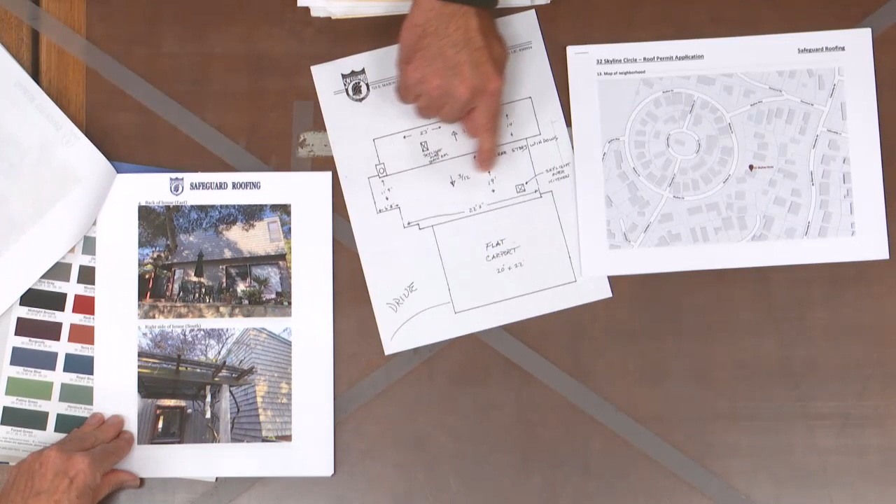So show us the roof. All right, so we have several sets of photos here, including our roof plot plan. This roof slopes in two directions, there's no ridge line because the roofs are like this, so there are clear story windows across here. From the street, you can't really see the back side, but this part is visible kind of through the trees.

So the very first photo here is the street view of the house, the roof is pretty much obscured by the trees. Then here's from the front of the house on the driveway, so you see the sloped roof and the flat roof here. We were also asked for photos of all four sides of the house, so here's the north side, we have east, south, and I think I skipped one.

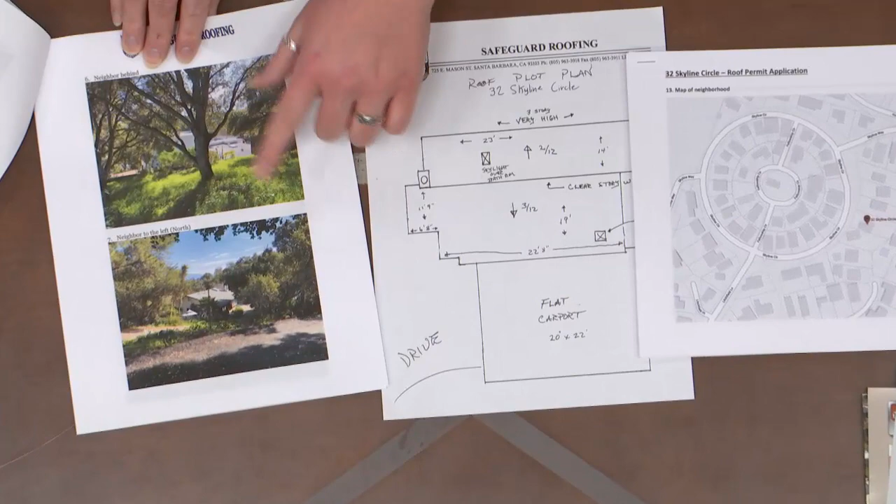West, north, east, and south there. We have several photos of the neighborhood showing various kinds of roofing materials used throughout. There are some neighbors to the back with flat roofs, some comp roofs, and there's a rear neighbor that has a corrugated metal roof, which we noted here on Fellowship, and we have a photo of that back here as well.

So they have a gray corrugated metal roof. That's directly behind Sarah's house, although you can see it from Fellowship, not from Skyline Circle.

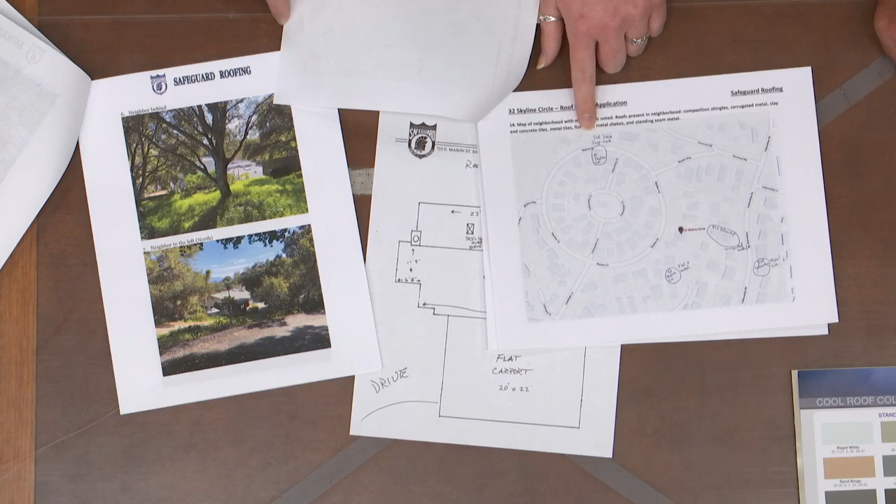So there were several other metal roofs in the neighborhood. There is a standing seam metal roof already on this street in white at 81 Skyline Circle. This is the proposed site, 32 Skyline Circle, that we are applying for. Down the street a little bit, there was a flat roof and metal roof at 20 Skyline Circle. And then also on Fellowship, there's a metal tile roof.

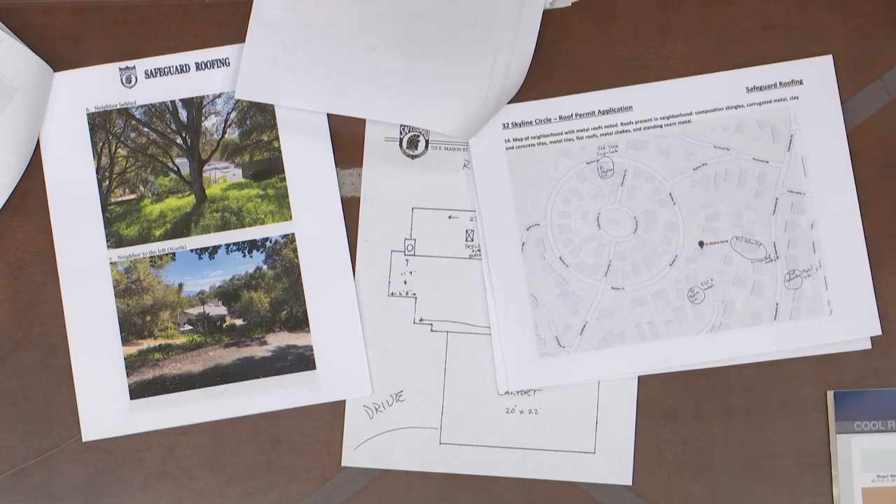There's definitely some metal present in the area, but the roofs throughout the neighborhood are composition shingles. There was a metal shake, a metal tile, a couple of standing seam metal roofs, clay tile, concrete tile, and a bunch of flat roofs. So it's quite an assortment, and I guess the word would be eclectic in terms of style and rooftops.

There's both traditional houses and even a very contemporary house, right over here on this part of the circle, sort of in between the traditional houses. And some old Spanish ones as well.

The color that Sarah was leaning towards is musket, which is kind of a coffee color. It actually reads a little bit lighter in person than on that chip. Her house has gray walls, some red trim and some green trim, and it was a nice contrast with that color. That color would blend really well with the trees and vegetation.

She has a lot of trees and vegetation around her house, to the point where when you're standing on the street looking down, you really just get glimpses of it through the trees. You don't really see it.

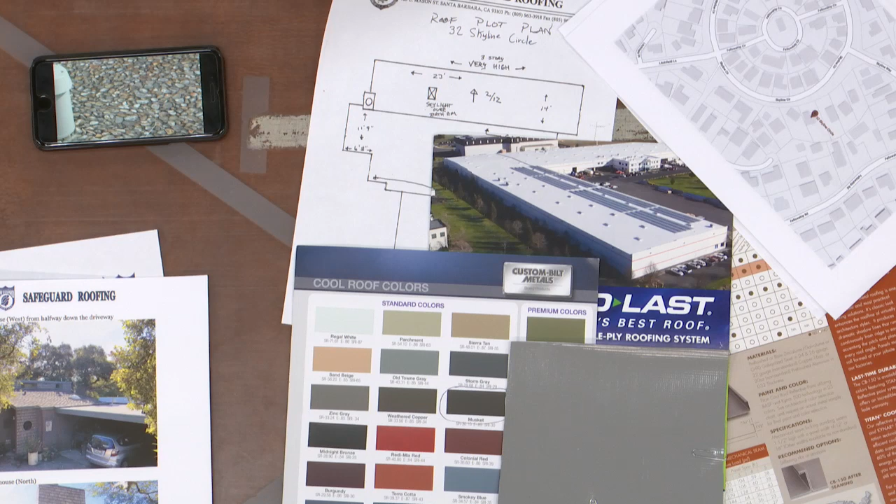So the house is a light gray with red trim and green trim, and the dark gray goes really nice with that, and that real dark musket, kind of a coffee color, contrasts nicely. So here it's a print of rocks, but it's the same finish. It's a little bit - it looks like bugs almost. Sarah thought it looked fake, her son thought it looked fake, and basically the consensus was we'd really prefer not to do fake. I can appreciate that. By the way, that was a color I had shown her already to see if she was interested.

So I have a question - the distance between the seams and the ridge heights. The distance between the seams is 16 inches, so it's just like standard construction, like 16 inches between the studs. It's a 16-inch wide panel, and the seam is the thickness of a 2x4, about a 1.5-inch seam like this.

They have different seams in metal. Most roofers like the snap lock style, where you push it down until it snaps and you're done - it goes fast. These seams will all be crimped, which locks the whole roof together. This is snap lock, but what we're proposing is a seam that gets crimped, making it real tight and monolithic.

And wind resistant. This is the standing seam that's on the same street - not the corner one, that's not what we're proposing. This is the panel we're proposing.

The metal is really nice if you want to do rain barrels and collect water - it's actually the preferred roof for that. Sarah and I had talked about that a little bit. It's also really nice if you ever decide to do solar - you don't have to penetrate the roof. The stanchions can actually clamp right to the standing seam, and then the panels can mount to that, so there's no additional work if you wanted to go back and do solar at a later date.

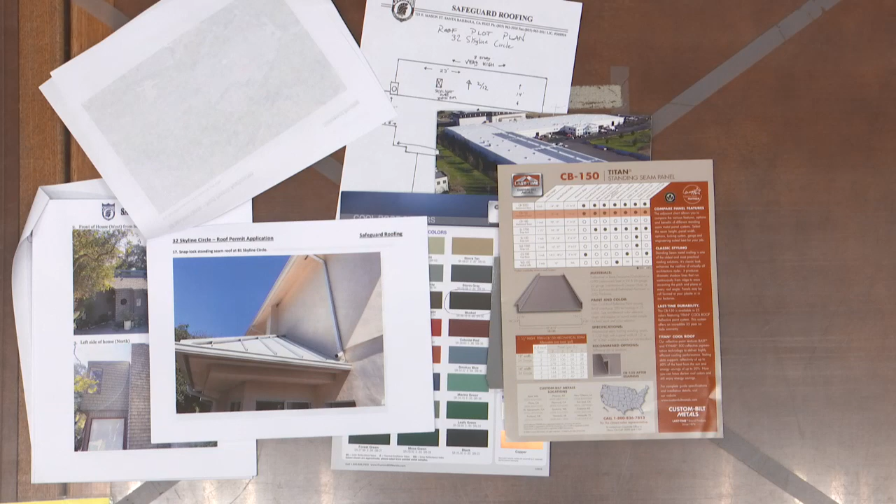What about gutters? Do you propose to put rain gutters around this that match it? That will be up to her, and we can do it, and if we did it, we could match them. I don't know if she's decided.

Rain gutters - would they be the same color, same material? Not the same material, but it would be the same color. The roof material is 24 gauge steel with a Kynar paint, and the rain gutters would be aluminum, but even though it's two different materials, you can match the color down. Musket - and it makes it look really tight, like it was well thought out.

Going to comments - does anyone have any comments? A couple comments I have: what is your feeling about doing it on 12 inches on center as opposed to 16 inches on center?

It tends to look busy. We've done 12, 16, and 24. The 16 generally has the best aesthetic - when you start getting them closer together and you've got a lot of lines on the roof, it tends to look more busy. This one is sort of a happy medium between the 24 and the 12. The funny thing from my experience is that narrower looks better than wider - the wider you get, the more industrial it tends to look, whereas when they're closer together it's different. I don't have a logical explanation.

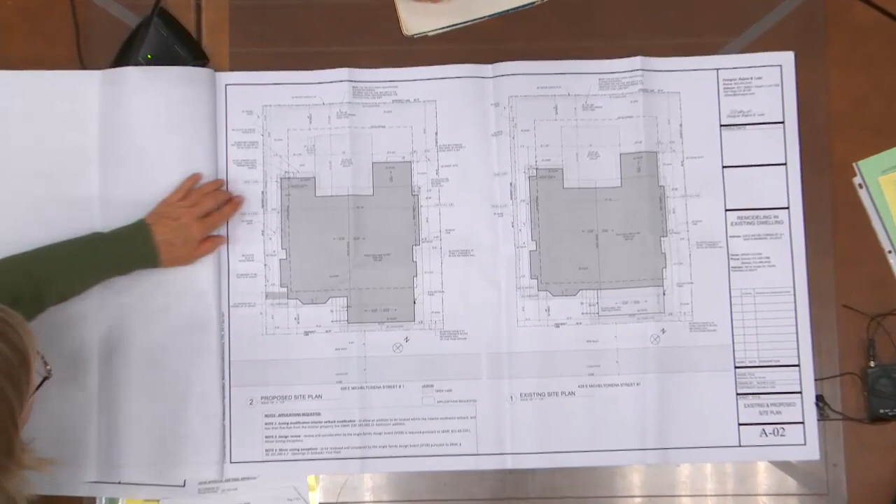Okay, so here's the water heater. Let's see if there's an elevation. Location of existing water heater — water heater cabinet walls enclosed with same existing house wood siding, gasket door. So yes, okay.

The water heater on the site plan, does it pop out? Turn it back to the site plan. There. Then the line should... looking at it, should have two lines right there, or don't have any. Nothing there. Sorry, let me point to that.

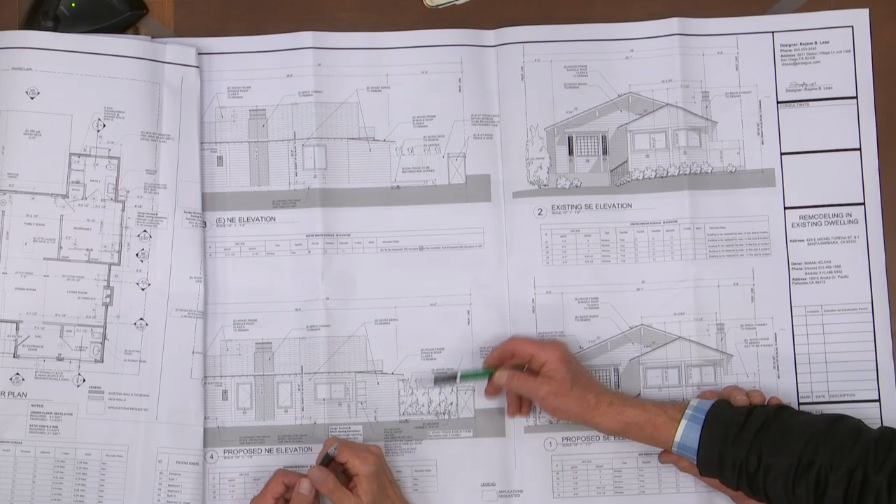It says location for water heater, cabinet walls enclosed the same as existing house wood siding, gasket door with vent. So it says it, but it's not drawn. Right, exactly. So there would be — okay, I understand, what is that, A4? No, A2. There would probably be a line down there like that. Oh, I see, okay, that's what the site plan looks like. Here's my architect, he's $200 an hour.

So, is there north? Okay, so let's look at the south elevation, southeast. Okay, so... oh yeah, okay, you didn't say it, right. What was that again?

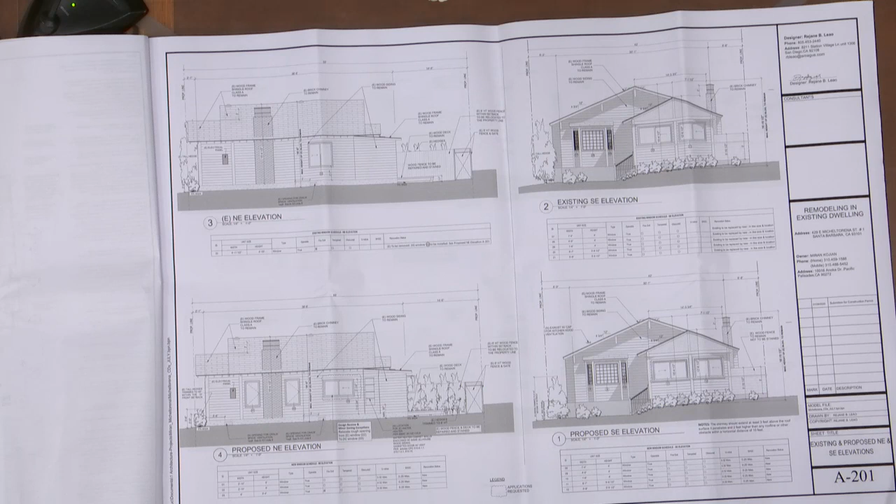Provide details of the pop-out window on sheet four. So sheet four — are your details... okay, all right. That would be these, that's the... yeah. Can we see, Erica, can we see the previous drawing? Yes.

Oh, I didn't go that far because it didn't include it. Put your thingy on — yep, I didn't know that. That's right, so we've now included a sheet. Yeah, this sheet's new, okay.

So I'm going to say you completed your presentation, so I'm going to bring it back to the board. Is there anyone in the audience wanting to speak about this project? Seeing no one come forward, were there any emails or communication? No, Mr. Chair, you're all my friends. Perfect, so we'll bring it back to the board for questions.

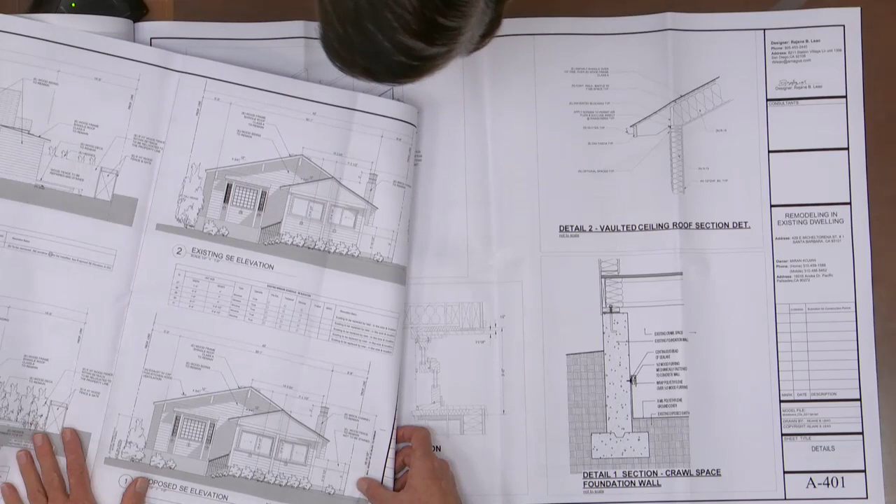Any questions, other than one? So I have a question — what is this little bracket down here? I don't think... there's a little bracket cut off on the bottom here. I guess there is none — where is it? It shows detail of a bay window. Yeah, where's the bay window? A big window, but on the...

9, 10 — 8, 9, 10. So I think they pulled it out of a catalog, it's probably a typical thing. Okay, but that's what it looks like, whatever. Okay, all right, that's a question I have. Any other questions? Anyone have any?

I'm not seeing how this water heater enclosure works. We played architect and drew a line down there. The description right here describes what is not drawn. That little funny thing is the water heater itself—I think they drew it in there. What it needs is a line down on the right-hand side of those three little boxes, which then looks like what the elevation looks like. So I think it's worded correctly, but drawn incorrectly.

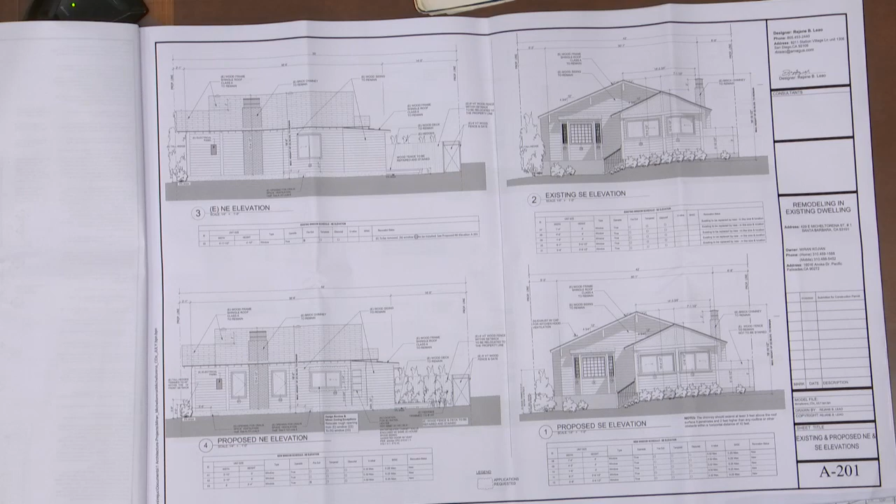Is that on the elevation? Not on the site plan—on the site plan it is not. It's drawn correctly on the site plan, but the way it's described, that's what we'd ask for. Yeah, the description is there.

Okay, hearing no more comments. Let's see, what are you here for—final design approval? Project design and final approval. So we can either bring it back to the board for another round, or if you want, give it project design or final approval—that is an option. So who would like to make a motion?

I will make a motion. The board would like to give this project design and final approval with the comment that you make sure you have drawn in the defining line on A201 that delineates the water heater closet on the northeast elevation, and that we accept the request for the minor zoning exception to allow window alterations located within the required interior setback. This project complies with the NPO findings.

It uses quality architecture and materials, is compatible with the surrounding neighborhood, has consistency in appearance, and follows good neighbor guidelines. Thank you—do I have a second? I second it. Did she say everything that needed to be said? Yes.

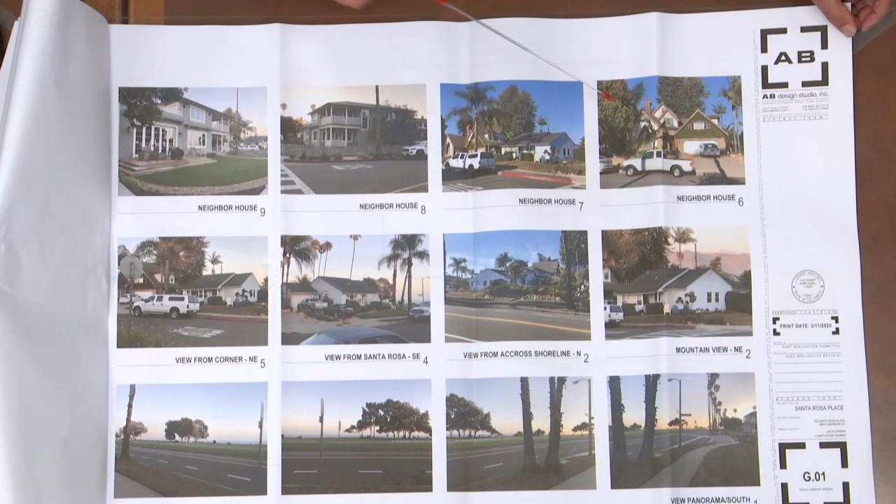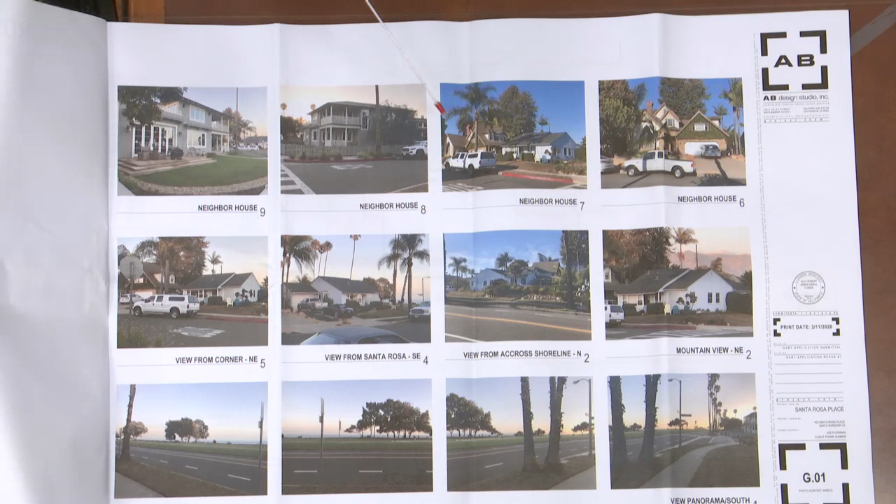This is a property across Santa Rosa on Shoreline that finished construction 4 or 5 years ago, I believe. Look at that. Neighbor behind us. Neighbor to the north, you can see here on Santa Rosa. Is that too far away? Okay, all right.

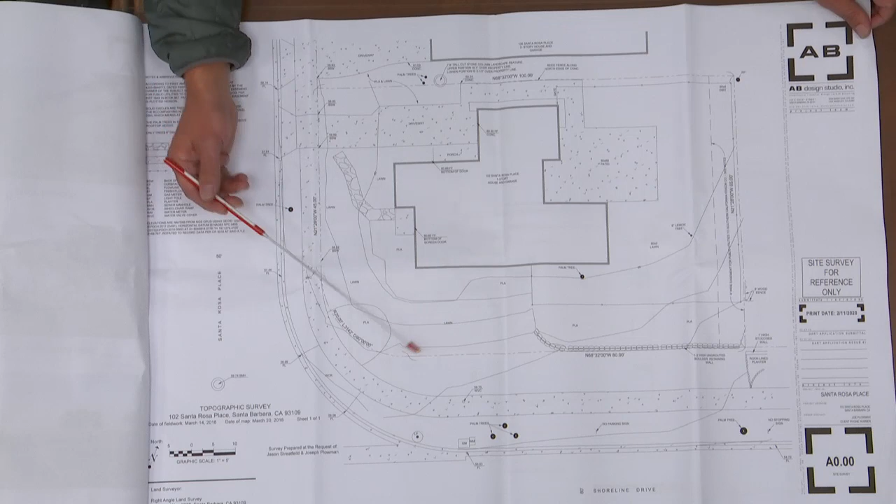You'll notice the property line comes along the back of the sidewalk on this side, but on this side we have a lot of real estate in the right-of-way. That doesn't really impact us, but we have a double front yard setback, here and here. So to address some of the prior comments, I'll get into that on our site plan—it's a fairly constrained site once you put in all the requirements we need.

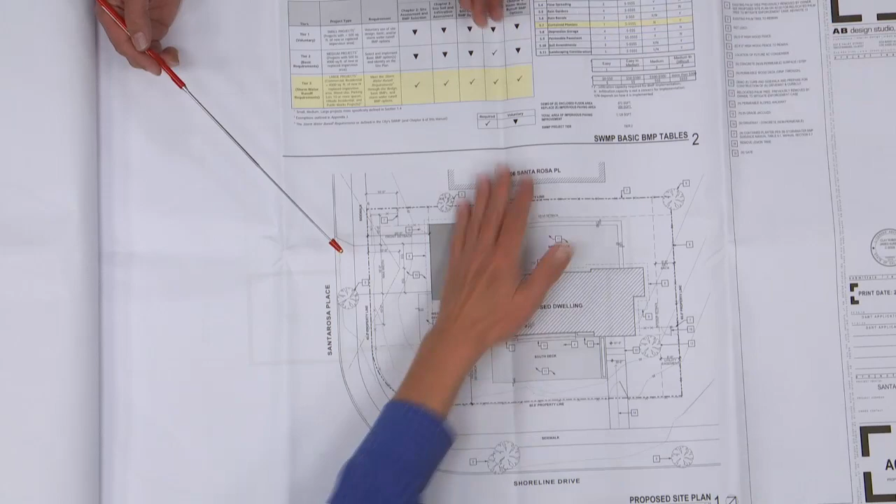So you take that line and these lines here, and your building sort of forms automatically. We do have a 6-foot setback on the east side, which we've pulled the house away from, just to provide more yard space. The home will effectively have a single-story garage here, and this will be 2-story with a deck on both sides and a real see-through feel—both sides open up. You'll see that on the floor plan. Now you remember?

We are proposing a full basement underneath. So a couple things—we've got a mechanical room. The owner's very interested in doing geothermal, as well as solar. We're looking at the Tesla solar roof panels as a potential. But that's the kind of drive of the house—we want it to be as eco-friendly as we can.

Floor plan—again, I mentioned the deck, so there's a deck here and a deck here, and these doors open up on both sides, so it's very see-through. If you're sitting back here, you could see out to the channel.

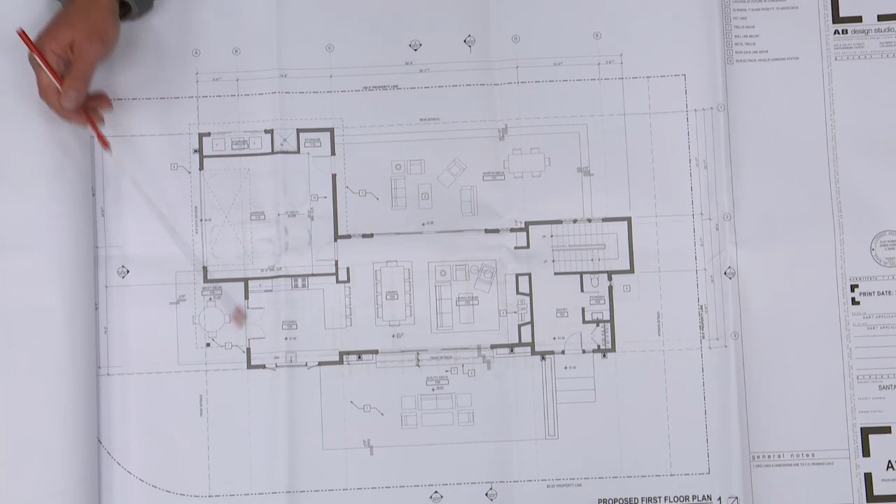Kitchen with a small deck off of it. Entry is going to be off of Shoreline. It'll actually be readdressed at some point, but we'll be coming off here with the front door. Stairs go down and up.

Pretty simple floor plan. Trash storage is here, an outdoor surf shower, a couple other things, but those are pretty insignificant.

The upstairs is fairly modest in size. It's got 3 bedrooms. The master's not very large. The closet, of course, is bigger. Fairly decent, modest master bathroom, and then these 2 bedrooms with a Jack and Jill in between.

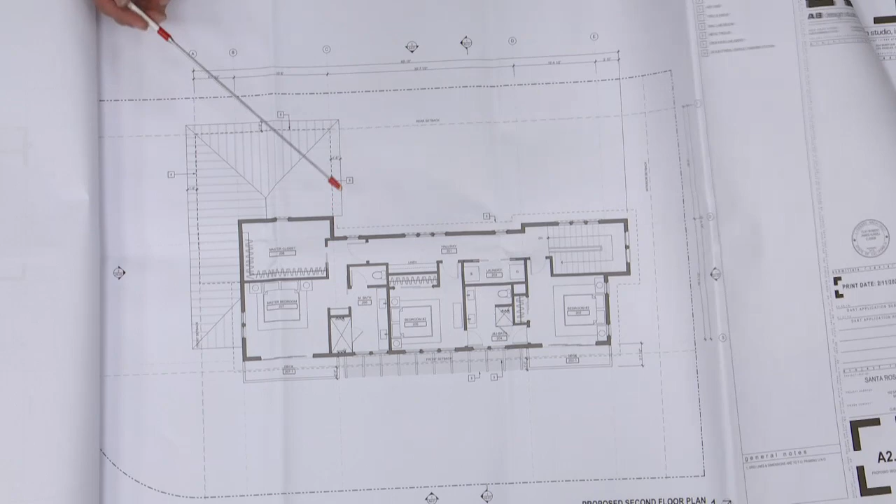Roof plan. So we initially were considering going with a standing seam metal roof when we first came in. We're looking at the Tesla roof panels now to see if that can be an option for us. If we do that, then that would obviously change this. And we have, I think, some examples of that system.

So the elevation here, this is the south elevation facing Shoreline, and the north elevation. The south elevation, we're really constrained on the size of the lot. So it is a 2-story house. It does have some variations.

These pop out a little bit forward. We've lowered the plate heights a little bit and raised the ends and lowered the middle. So we're trying to vary that.

There was a comment from a board member at the last hearing to maybe add a trellis or something like this along the front. So the previous drawings? I don't think we brought them. We'll have them, she'll have this. Eric will find them. And then we've really just been working with windows and details.

So the idea would be there would be integrated planters in front of the house. This would plant up and vine across the front of here, thus breaking down that 2-story mass.

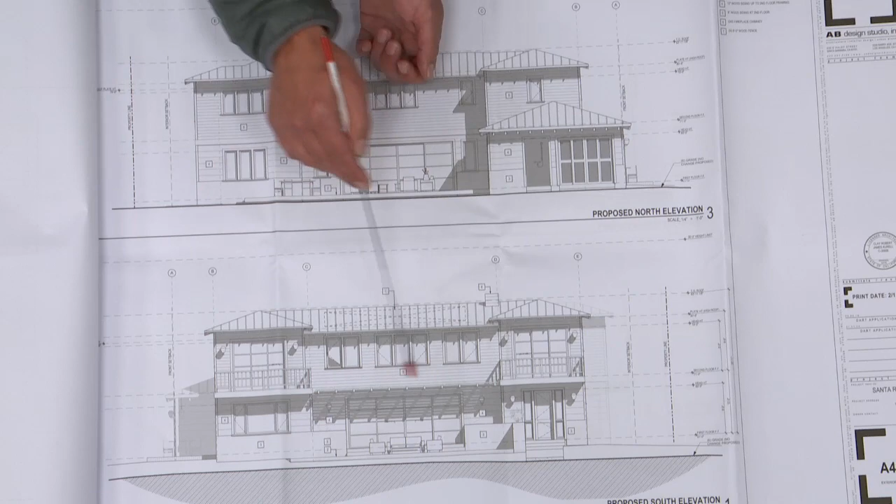Let's just see what transpired since. So this is kind of what we had before. Which one's south? That's the south.

So we played around with these roof heights a little bit to give it some variation, but it's always going to look funny in a flat 2D elevation, as we all know. So the windows changed, these changed down here a bit. This came up a little, that went down a little.

Consider lowering the west corner element of the whole structure in order to change the bulk of the building. Did you do that? Yeah, we considered it, but again, we're so constrained with our setbacks that we really can't lose the square footage and change the overall shape of the building there. That would be this corner, which is the master.

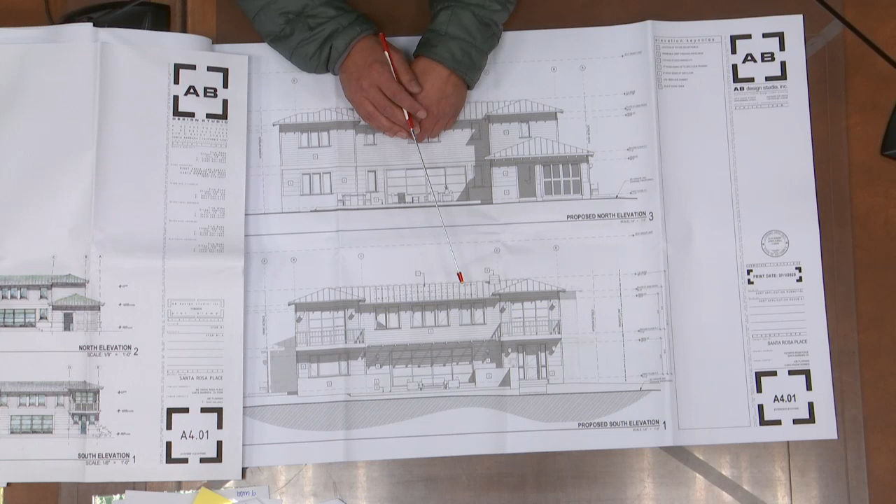Study the windows on the east elevation. Did you do that? Where are we? East elevation? That's the next page. There was a comment previously from one of the board members who's not here, just really around this window on this side. So we've altered it a little bit. We've added a couple windows up above in the bedroom. But there's not a lot of change to this side.

This is east. There's a new window down, or this window changed a little bit down below, and then these 2. I think it's added a couple more windows. Yeah, it changes the size. That just looks more in keeping with the neighborhood than that.

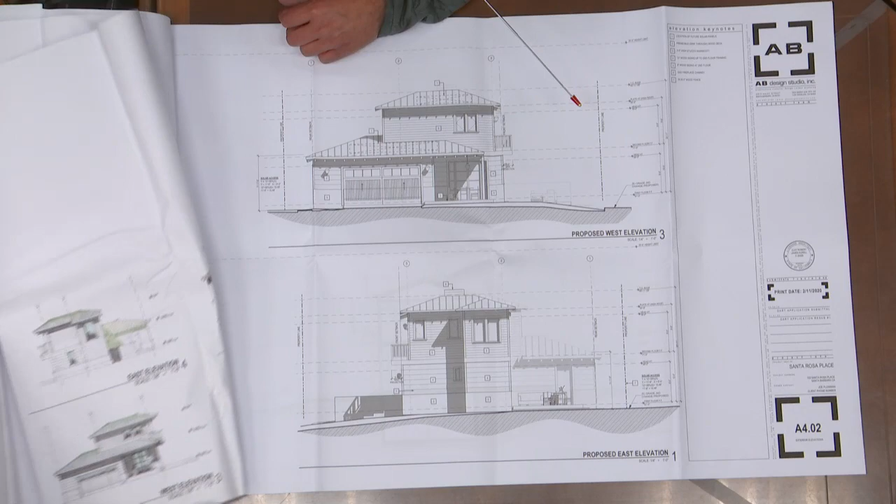So we're here for concept review. We're in the DART process, going to planning commission. So we're looking for favorable comments from this board to take us to PC for our CDP application.

We've also brought some elements of the design to discuss. So we're looking at steel doors and windows in these kind of locations and here. Here's kind of a palette of materials that we've been looking at with the owner. Nothing's set in stone yet, but that's the basic direction.

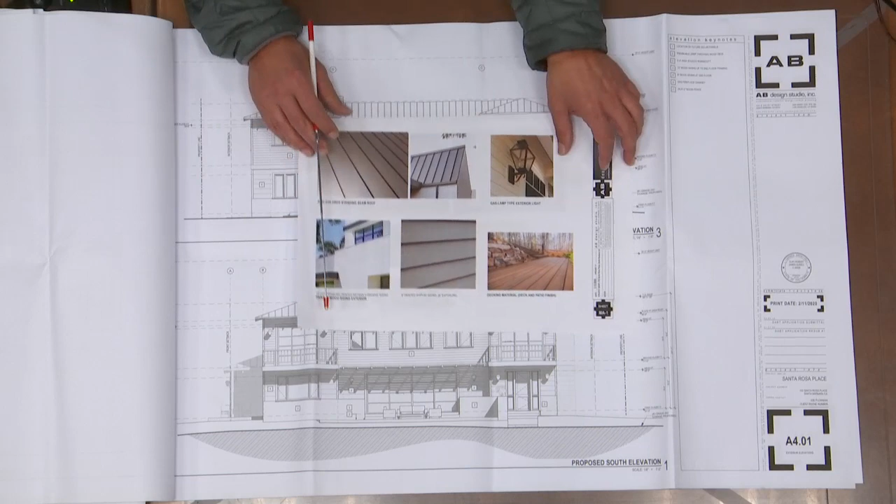Light colors, potentially a gray metal seam roof, or if we go in the Tesla direction, it'll be a little different. Some gas lamps and stuff that you see like here and here, around the building, and then basic roofing materials. So this is an early material palette for the project.

What is ground cover? Just low ground cover. Nothing yet. I don't know if we really want to do... I don't know what we want to do there, to be honest. We are going to have to deal with tier 3, so we'll have to get that eventually into the working plan on the SWMP.

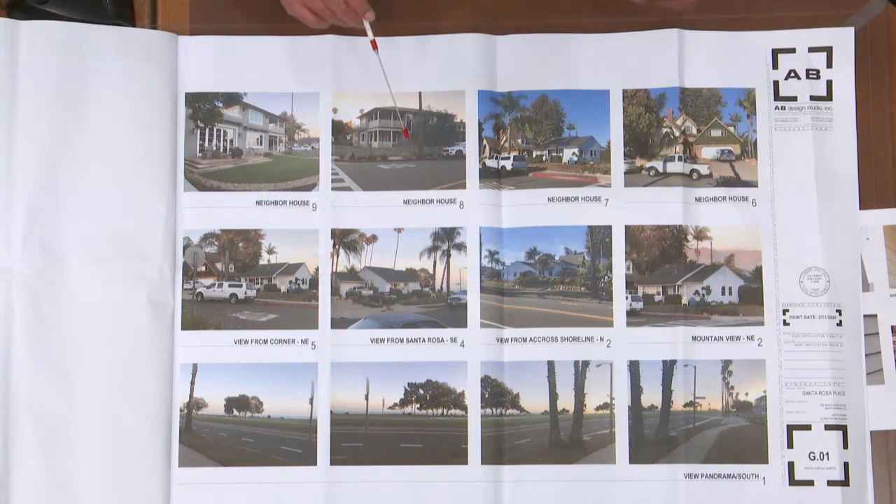What is number 9? That's the house across the street, across Santa Rosa. Number 8 is across Santa Rosa on the corner. Are they the same house? Yeah, sorry, that's the same house, just a different shot. Oh, I see, okay. Sure, yes, I see it now. The house to the east is a one-story home similar to the house on our property, which is this one.

Okay, I have some comments. I'll wait, I'll get fewer questions. Anyone else have any questions? I don't have a question. Jan? I do.

So, on the front, I'm looking at A4.01. Are these planters on either side of the deck going to hold something like wisteria or bougainvillea that's going to grow up over that trellis? Yeah, that's the idea. That's on the south elevation you're looking at? Yeah, south elevation. So that's what's looking out towards the beach.

Okay, I have some questions. One of the things said in the minutes was to consider lowering the west corner, and to study variable plate heights and lessen the bulk of the building plate heights.

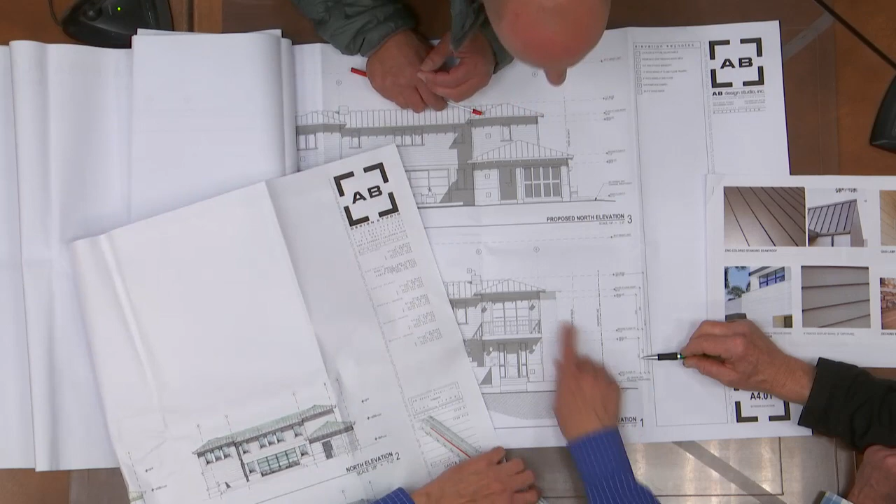So plate heights here, the first floor plate height is 10 feet, correct? From finished floor to finished floor, is that right? So the ceiling on the first floor is 9 feet, and then the second floor, it looks like this part is 8 feet and these are 9 feet. Is that right? You have a 9'6" plate height for these, and for the interior it slopes down.

So essentially there's been no change, right, since last time it came? There hasn't been a lot. We pushed and pulled these up and down. We might have ended up back where we started, but we were going back and forth on plate heights for this roof and these roofs. It did go through some gyrations.

Where's the south end? Consider lowering the west corner — what's this? That's the master bedroom, just going by what was said.

So it looks like the west corner was not lowered at all. Nothing was done, right? That's correct. We felt like the symmetry is working, and dropping this down would mean losing the bedroom, which probably wouldn't be a good idea.

Okay, those are my questions. Let's go to comments. Who has comments?

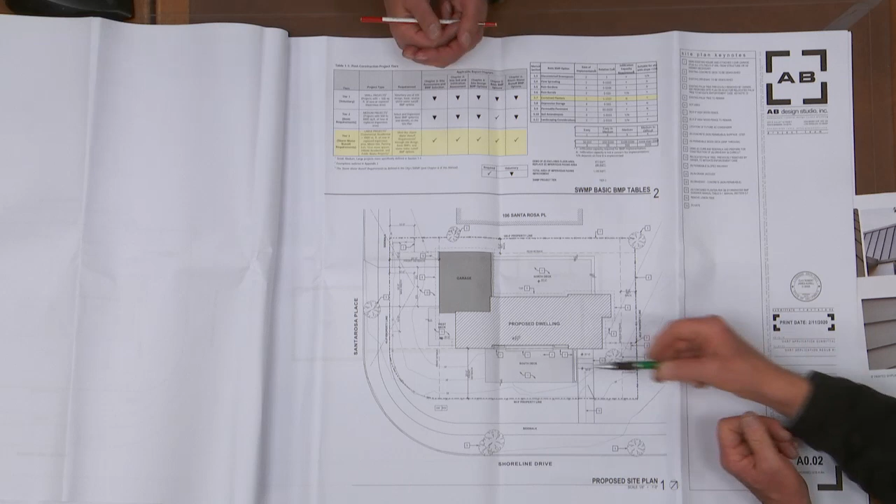I like what you've done. I mean, the house is a house, and all those houses should look out onto the view. They should, and you've got all this space in front of the house that can't be built on. You might as well put a deck there and put landscaping in, and use the deck like the other houses along there use it, to look out at the view and all the people around. This one next door, if it's one-story, it's going to end up being a two-story pretty soon most likely, and all the other ones are two-story.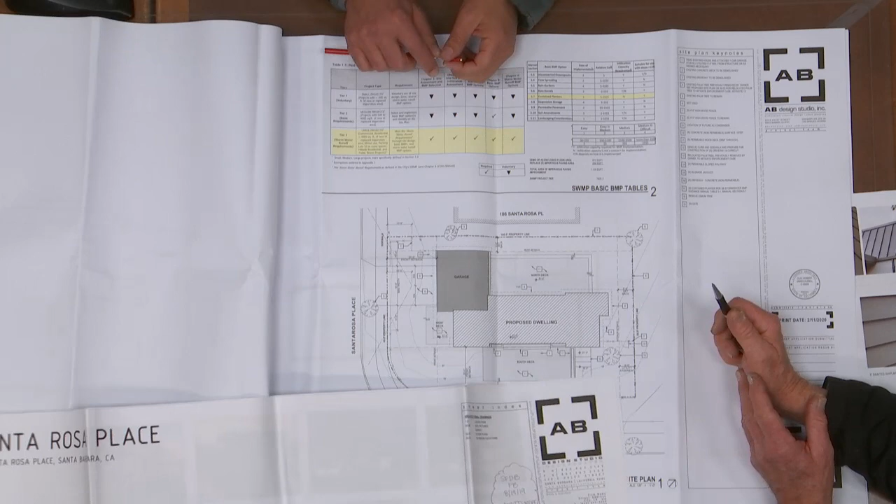I like what you've done at the terrace. We asked to reduce the size, bulk, and scale, and I think the terrace has done that. The lot's got a lot of constraints because it's made the lot very narrow. You need your yard area, open area. Yeah, I'll leave it at that.

Yeah, this is what the deck used to look like.

Yes, Lisa. I feel that the bulk, as it reads from shoreline, is still too massive, and that from the south elevation it looks too monolithic on the sides. The west elevation, you improved the west elevation.

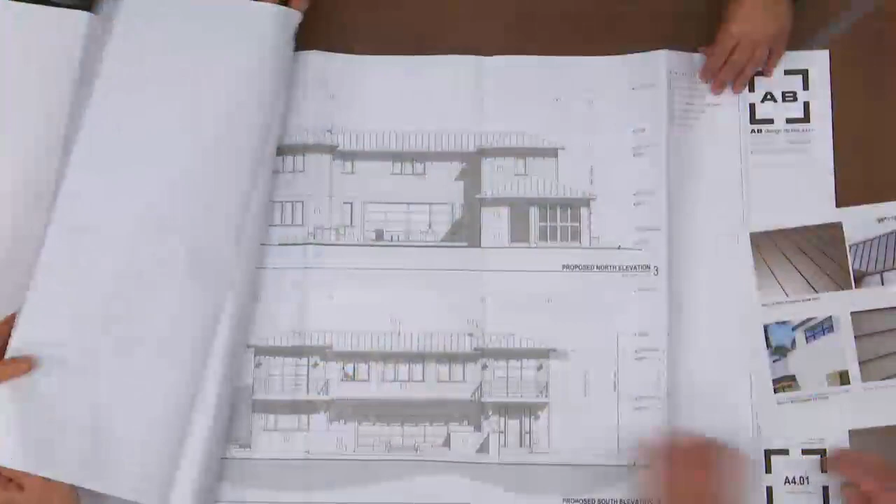Can we look at the elevation? Yeah, right there. Trying to get there — one more. West is here. Yeah, the west elevation. That's east. Okay, this is the east and the west elevation, Rito.

Okay, but the proposed south just looks too — the mass just reads as too large to me. And I don't think you paid any — I know you didn't lower the corner as we asked you to do, and I don't think I can support it in its current state.

I'm also wondering how everyone else feels about the idea of having a see-through, a look-through to utilize the view — I think that makes a lot of sense. I'm just not sure about the configuration of the windows in front of the deck.

What are you not sure about? It looks like a garage door, just the way the panels read. It looks garage door-ish to me. Okay.

Robert? I can see where — this is the first time I've seen this, so I wasn't present at the last meeting for this. I can see where the design of this house is kind of driven by a lot of the constraints they're working with, and it seems to me that it kind of matches what's happening on the other side of the street, on the northeast, the other corner. I think they're kind of like, I could see those two homes in tandem with each other.

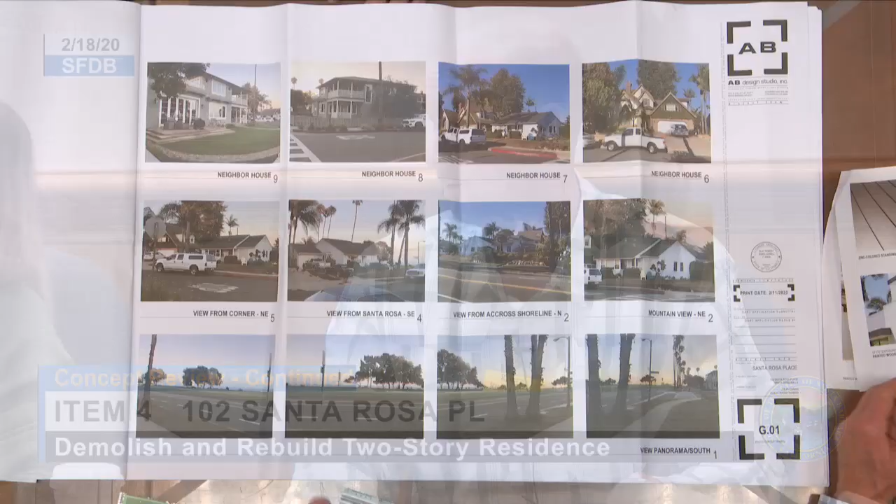I think the landscape plan needs to be studied, because the house I'm describing on the corner has a pretty strong relationship with looking out onto the view, and I'm gathering that's probably the same goal of this home. So I think, if anything, it's kind of minimal landscape to not block any of the view, but I think your elevations could really be improved by incorporating some kind of vertical accent planting, whether it's palm trees or a small accent tree, because right now the elevations are reading as just kind of this large home, and there's no landscape to really soften it. I think that's really going to benefit it.

So I would encourage the applicant to maybe consider how the landscape's going to help soften the appearance of this home. And also rendering, if you are going to put a picket fence, let's see what that looks like with the combination of the planting, because I think the house on the corner there has kind of accomplished that well. So the landscape, I think, is kind of a big part of this, and it's kind of a minimalist landscape in a sense. And so I think that starts to kind of read with how this house fits onto that corner.

And I don't see it being in big conflict with what is in the neighborhood currently, so I kind of support it. Jan, do you have any comments? So my comment is I kind of tend to go with Lisa.

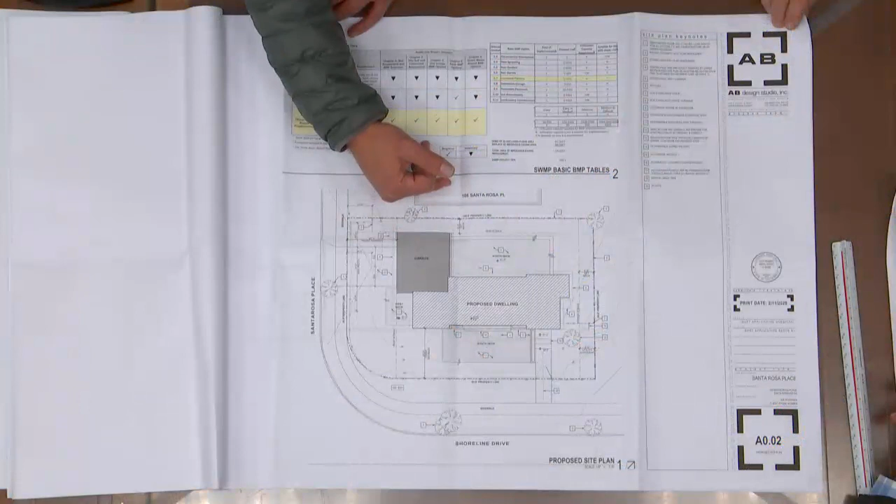Well, look, the point is it's really hard to evaluate a design when you're looking at a flat 2D elevation. True, we all know that as architects, right? Yes. So the big constraint on this property, and just to clarify, this is a one-story portion, and it's more than 30 feet away from that other structure. And yes, we have quite a bit - if you're at sidewalk level to the house, this house is pretty well set back away from the corner.

Based on the program of the house and the footprint that we can work within, the only way to lower this corner would be to relocate something and push the building more towards the east. Why? Because we don't have anywhere to go. We're all hemmed in with our setbacks and our requirements.

Okay, so well, my question is, what does plate height have to do with this, the plate floor heights plan? Plate heights are, I mean, I have a 9-foot ceiling on the ground floor. That's not that tall, especially in this location. The existing homes that were built there were 8 feet. Yeah, and they were built in the 50s, and everything's rising and being replaced. I know, but can I just interject?

Of course. What about, I remember last time we talked about keeping that 9-foot plate height in your center area, your living room, your dining room, but then dropping it down a foot on either corner of the house? Yeah, but that just adds steps to the second floor. That doesn't seem to make a lot of sense. Not adding - I don't think you understand - not changing the floor pattern, just bringing your height down.

I don't know, I don't feel like it's very tall. The house is barely 21 feet to the top of the ridge. It's definitely not pushing an enormous mass. Almost 23 feet, I think. Also, we're looking at size, bulk, and scale - we're still looking at what we looked at before, the north and south elevations.

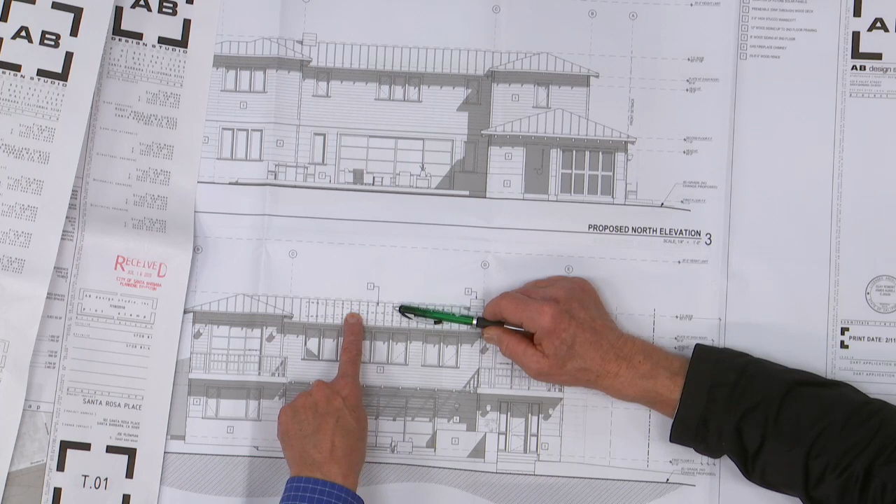They raised the center of the roof - the center of the roof is higher now. Okay, it looks like it dropped down between these two on the previous iteration, or did they lower the ridge outside here?

Is it higher than it was? Did they lower that outside piece? If these are the same - so you basically made the house look bigger and more bulky?

No, this came down. Well, not down on that elevation - you can look at that elevation, then this elevation. Where's my scale? This came down. See, it all came down a little bit.

So everything came down, that and that. I scaled it at 23. Here are the elevations written on the side - yeah, there. But look, it says 22 feet 11.

The grade lines are a little different now because we got our topo in here, but I was going by the finished floor - this is the finished floor here.

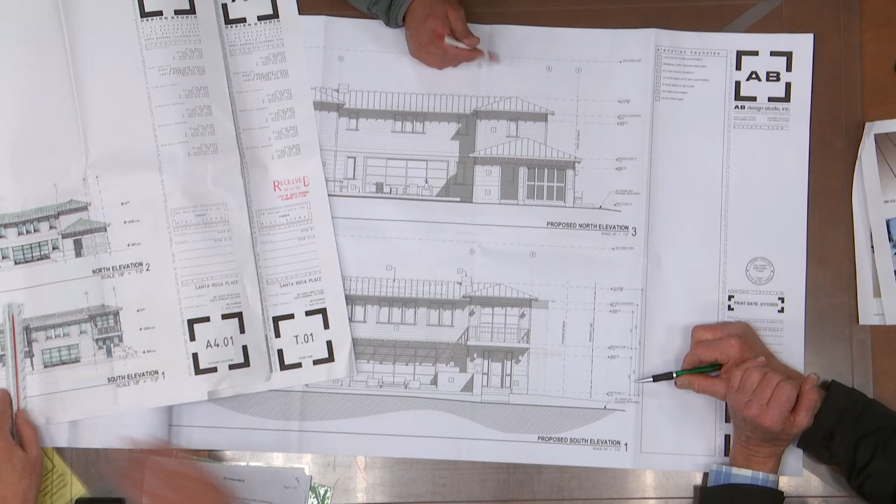So what do we have from the finished floor up to the ridge? Here we have 22 feet 11 inches, but I scale it at 23 feet from ridge to finished floor. So we've gone up almost a foot higher.

Wherever it is, you've gone up higher, which makes the house look bigger - it's not a foot higher. Please, let the board talk - this is not open to discussion. Just for clarification, 22 feet 11 and 23 is not a foot higher. Okay, thank you, but please don't talk, okay?

What is this over here? You said it was 22. I said it was floor to 23 - 23, 23, it scales at 23. 21, 22, 23 - actually it's scaling at 24, so I'm wrong. 20, 21, 22, 23. Okay, 23.

And on this it says 22 feet 11, so it's down - it's almost exactly the same. I thought you said 24? I'm wrong, 24 wasn't right, it's 23.

I would like to see it brought down. I like what you've done here, and I think it fits the neighborhood because we have a lot of second-story houses all along there, and the one across the street is two-story.

But I still think, because we have a long area here, it's a massive two-story building from east to west. You did soften it with this trellis right here, but the height is still the same.

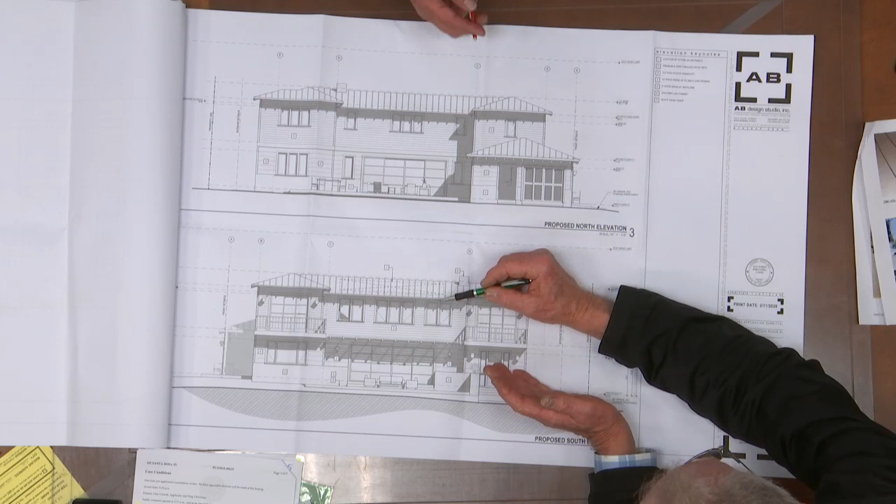You've played with this, and when we look here, it just looks like this is taller now, where it wasn't before - it was here. So yeah, I'd like to see it just brought down.

Is the back of the lot sloping? The lot is sloping both directions from the back corner, but it slopes towards the front, to the ocean, yeah.

That's what this grade line is. We don't want to lower the house, and we don't want to lower the lot anymore - we want to keep it up at the height of the grade and the house next door. We have a 10-foot plate, a 10-foot floor to floor, and a 9'6" plate - do you think that should go down to like 9 feet?

Ideally, what I'd like to see... like this is your finished floor - yeah, no, this is good. I'm not going to say anymore, sorry.

To reduce the bulk of it, there's no reason why you can't bring the second floor down to even 8 foot, 8.6. Your presentation of your house is your living room, and we're allowing you to keep that up there. But bedrooms, do you really need that massive height in your bedrooms? No, I don't think so. Doesn't seem massive to me, but well, so make a motion.

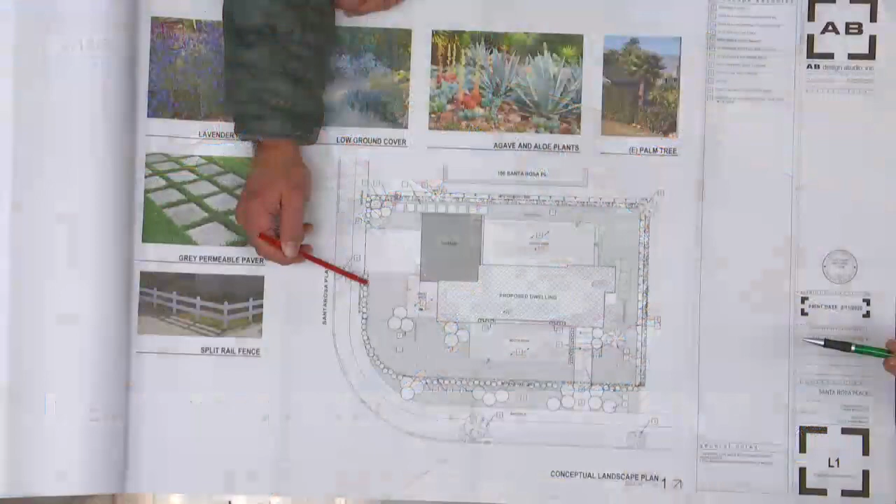There's a low fence, like something like this, nice, initially, that goes along here. It's not a 6-foot fence. So that's on the landscape plan, but if you can flip back to the site plan, the proposed site plan. Okay, I emailed the applicant about this about a week ago. We've been trying to clarify that for you. This fence is proposed.

Keynote 7 says new 6-foot high fence. This is an existing fence here, which is 8 feet. There's a symbol for fence, which is our split rail fence that goes along here. And it is not ever called out anywhere as being 6-foot high or 8-foot high. It is the split rail, the low 42-inch high fence that we're showing you.

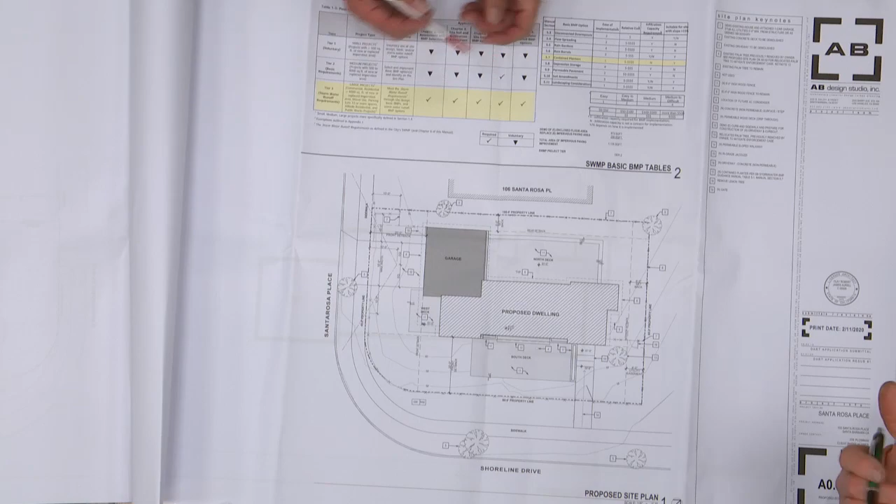Okay, so that's not, there's no need for an exception. Yeah, there's no MZE needed here. Well, so I'm the planner, my name's Stephanie. Yes, please, I had emailed the applicant asking for clarification about the keynote. I think it's keynote 6, it points to where the gate is.

Note 7 is pointing to this fence right here. New 6-foot high wood fence right here. Right, new gate, that one? But 7, here, this is this fence wrapping around and going like this, and that's 10 feet off the property line. So this says 6 feet.

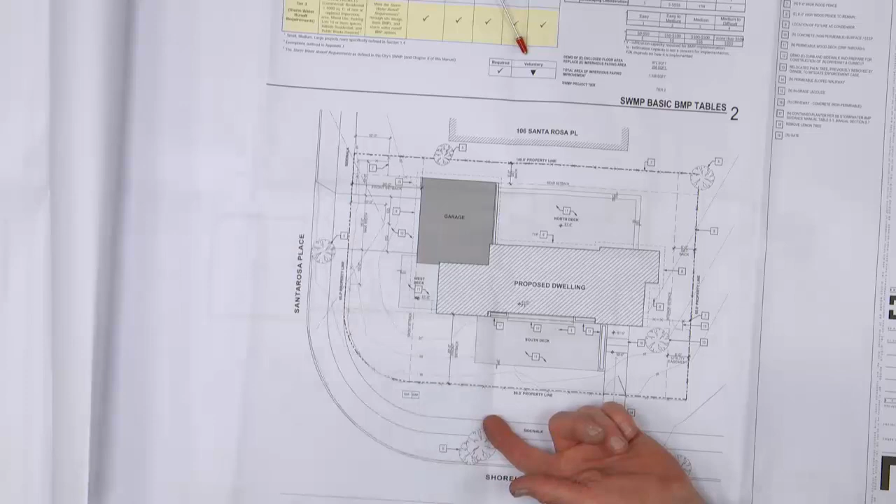Keynote 7 was the one I was asking about, 6-foot high extending wood fence beyond the gate along the northern interior property line, and then wrapping around the front lot line to the driveway. There's no indication on that lot. I think there's just been some confusion because there's this little symbol indicating the fence, and nothing isn't explained. So please let her explain what she's asking for.

The keynote I was asking about was keynote 7, pointing to this fence here. Correct, then it extends, this fence, it's the same lot line, or it's the same line type that goes around here. And there's no separate keynote saying that anything past that drops down to less than 6 feet.

So I was assuming it was 6 feet. That's fair. This is pointing to this fence, which continues here. Okay, but all of that height needs to be called out, it's not being implied as 6 foot high. Okay, but then the height at 3'6" needs to be called out so it's clear. That's easy enough, good, but that would never be a 6 foot high fence. Okay, so would someone draft a motion, please?

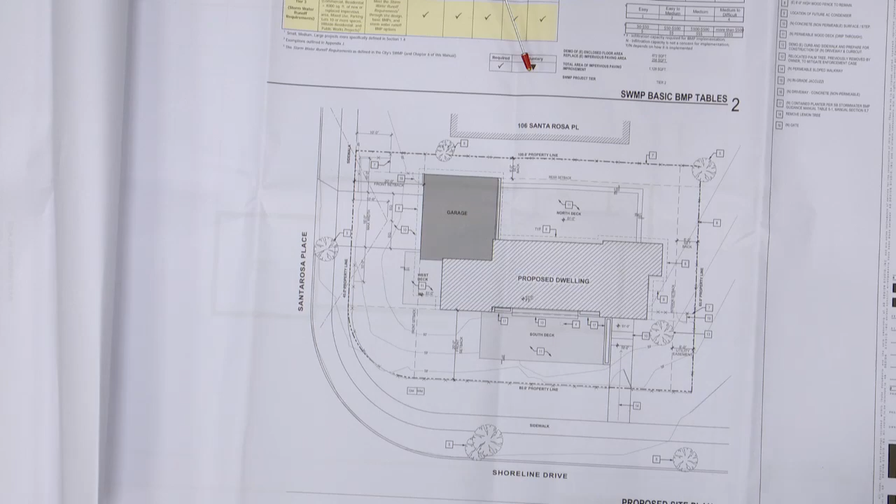I'll try, thank you, Jeff. I'll do this, all right. We would like you to come back in 2 weeks if you'd like, definitely. And we would like to have the plate heights of the house reduced. Yeah, reduce the plate heights.

You have already stated that landscaping will be forthcoming, so come up with some more landscaping. And somebody said something about the windows. Windows are fine. I'm trying to put a little bit of everybody in this proposal.

Yeah, I indicated a little bit more solidly what the heights of the fences are, so planners are more aware of it.

That's my proposal. Can't get any more different than that. Okay, thank you, Joe. Do I have a second? Any discussion?

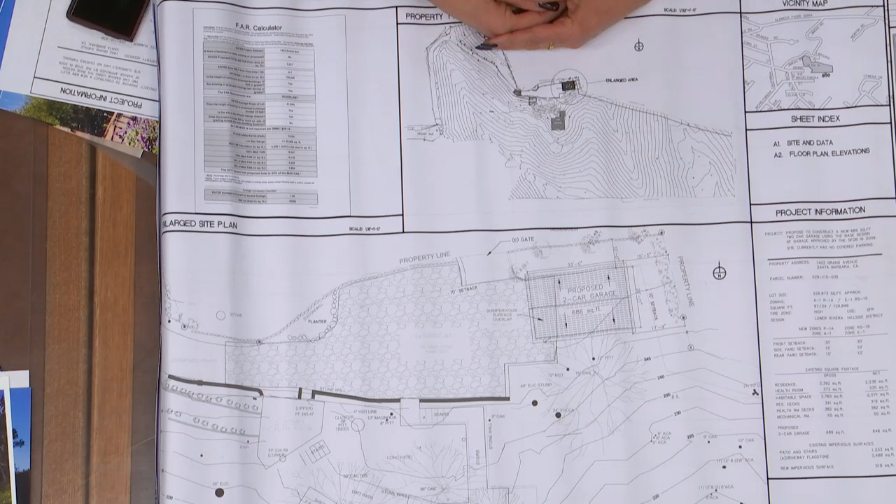So when I say it's new, it's old - this was approved originally. I did stretch it, but the design and look of it is the same. Part of why we made it longer is that the minimum is 20 by 20 for a two-car garage. Width-wise, we can barely fit that in before we start going too far down the ravine.

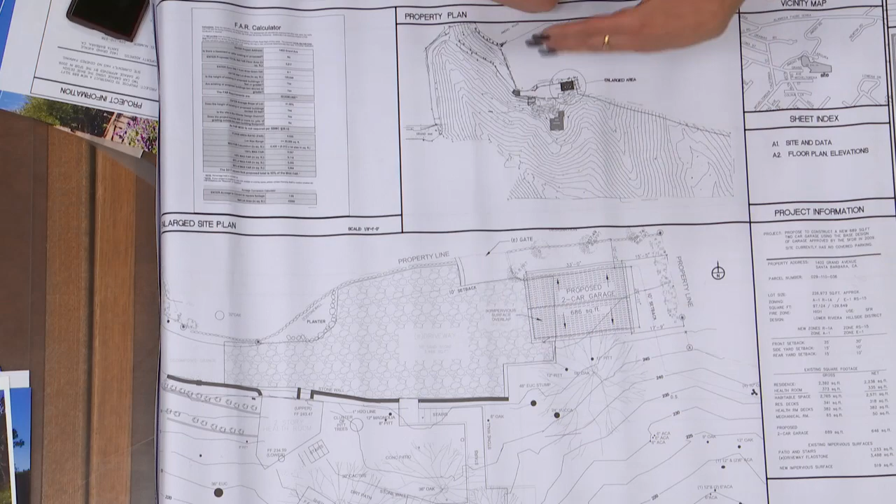The client is married, has two young children. He asked if there's any way we can make it longer so he can store toys, bicycles, kayaks, and other things of that sort. Because it's such a limited lot, in some areas it has a 46% drop. It's a 5-acre parcel.

Yeah, so you see that there. This is one of the few flat areas that's workable, so it only makes sense to elongate it and allow the client to have some storage. I think that's only reasonable. That's the only change in our design.

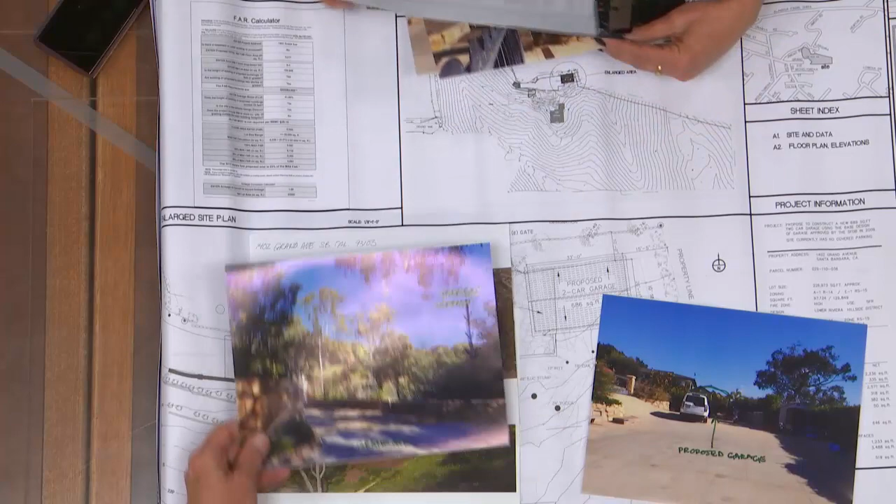So this shows where the garage is going to be, this site area - correct, garage location. This is from the end of Grand Avenue. As you can see, here's the end of Grand Avenue, and the driveway is like 689 feet long.

So this isn't seen from any public road, really, and then it goes uphill. Ligura Place is up here, and this parcel up here goes up, so it sits down below those houses.

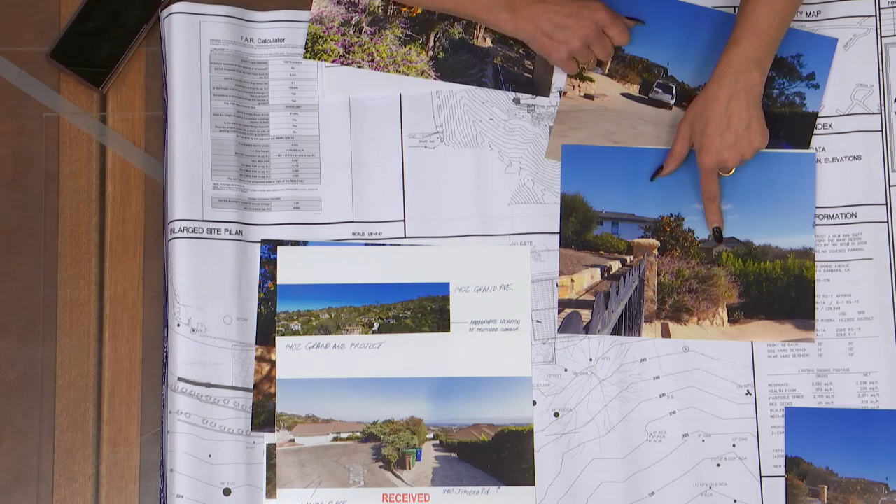I think I have this in here too, but he has a shed, a storage shed, on the property right now, and this is more or less almost the location of what the garage would be. Got it. There, yep.

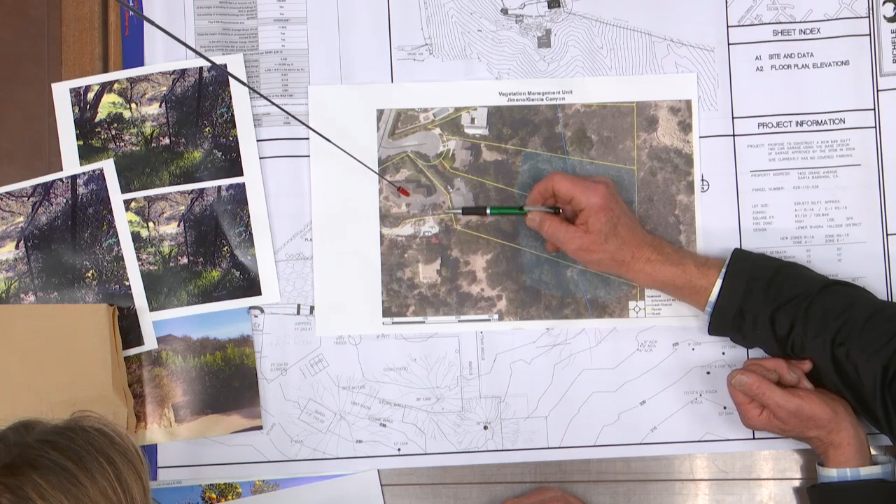Well, that doesn't matter, we're concerned with the location of the garage, and where your house is here. Right here, his house is here. And so our living room is here—where is your living room? Right in this part, right here, in this corner? No, it's over here. We have a floor-to-ceiling slider here that looks out, right here. So your living room is the whole end of the house here? No, it's here, but there's the slider that looks out, the roof covers a deck.

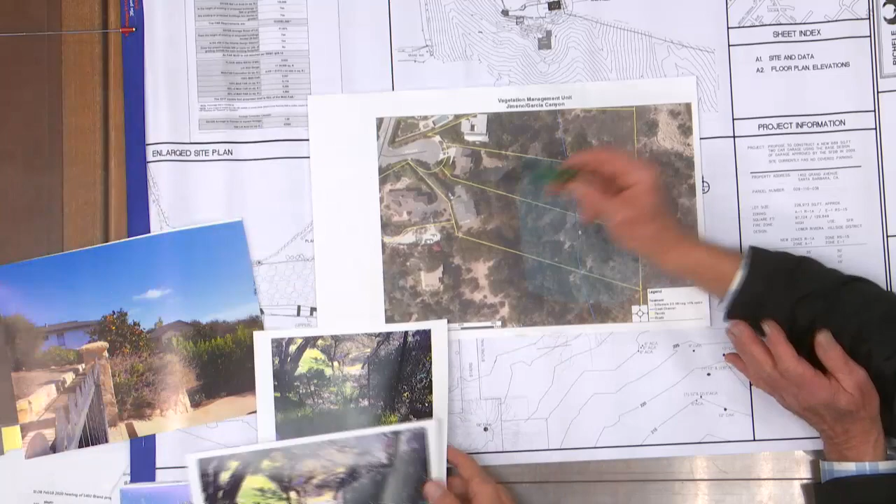That's okay, that's all right, I think I got the message. Are you, yeah, Guillaume? Okay, all right, thank you, I got your point, we're clear, thank you.

Thank you, appreciate it. But the real point is here, is that there's a road that comes down—you can't see it because this is so old it doesn't show it—but it comes right down into this area right here. We think that the garage makes more sense being connected to the house down here. And this road is used quite regularly, as Dr. Campbell was saying.

Okay, I think they proposed the garage where they'd like to have it. Okay, let's leave it at that, thank you for your input. Oh, okay, let me see—this is what you're proposing, this is the garage? Right here.

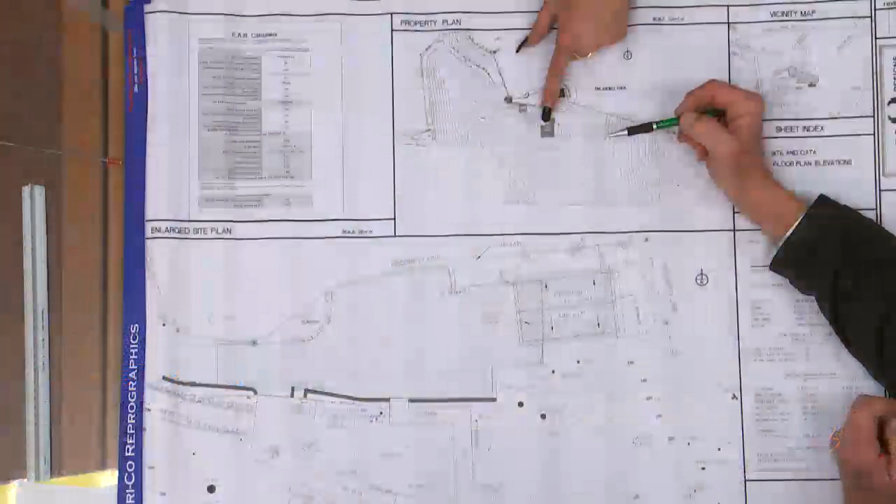Drevel purchased the property back in, I want to say the late 90s or mid 90s, the house was actually condemned by the city of Santa Barbara. I have photos of how it looked then -- it was really an eyesore, pink, blue, five different types of siding. The gentleman actually went insane and was institutionalized, and it showed on the house. The city had condemned it. So Mr. Drevo did a lot of work to it, and if you saw the before and after, you'd be amazed at the difference. He had some plans at some point to maybe put a slight pitch on the roof because it's more aesthetically pleasing, which is what the other board had thought as well -- more aesthetic than just a flat roof.

This is a very nice upscale neighborhood in general. So it needs a garage, it should have a garage -- that's the best place for the garage. And we can't sit here and say, because somebody proposes this, our board doesn't cover private views. So if somebody is blocking your view, it's not for our board to say yes or no, that you can or you can't.

Yeah, that's all I have to say. I think it's an appropriate place -- you have something? My feeling too, to follow up with Joe, is you've already got a driveway here. This seems like an appropriate location. I think you're sensitive to that.

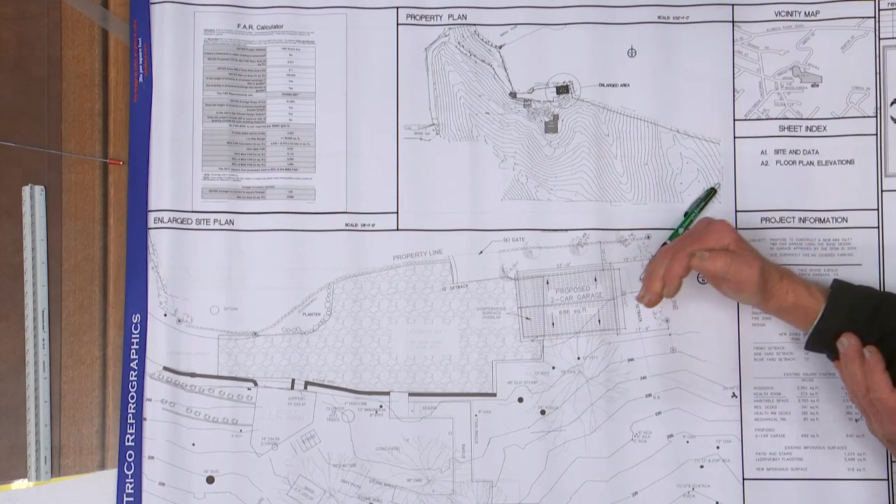As far as the view from your house -- I'm guessing, but tell me if I'm wrong -- I think they're just taking out the last 5% before you hit the mountain, before you hit everything that's there, before you turn to the right. You're talking about my view? Yes, I'm looking straight at you. I'm looking to the east, I guess. You're looking to the west. West, is it west? West. Yes, but they're obstructing your last few degrees of that full 180-degree view that you have up there. Tell me if I'm wrong, but you have a full... don't have them tell you. I don't want a discussion.

Someone make a motion, please. This is for comments only, right? Yes, thank you. I'd like to comment that the design of the garage is nice and it is consistent with our city's scenic characteristics. And because of the size of this, you will have to comply with Tier 3 stormwater management, which will make sure that creek is sufficient and cleaned out. Thank you, and that's it.

Would you like to make a motion? That was my motion. I said motion, this is my motion, okay. Second. Right, and that was it, because it's not design approval or anything else. So comments made only. Got it, thank you very much. And second, okay -- all those in favor say aye. Aye. Opposed? Thank you, thank you.

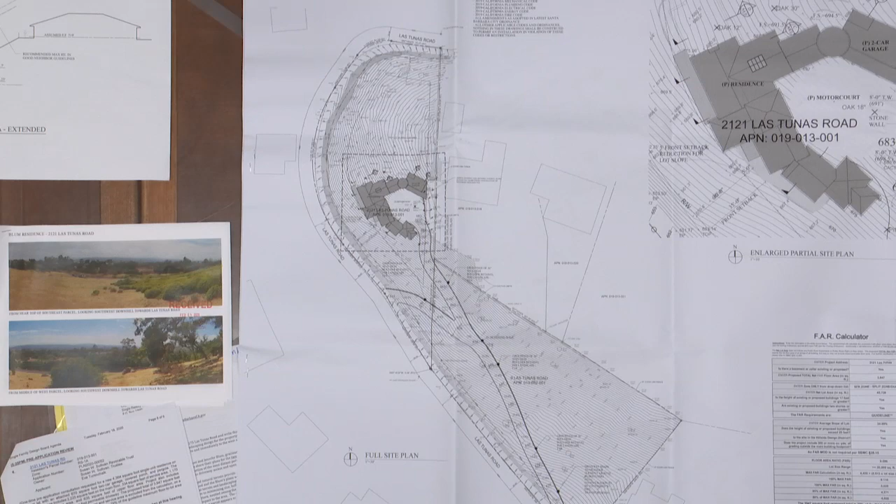Basically it's a one-story house with a walkout basement on the downhill side and a second floor above the garage on the uphill side. So even though it's a very steep lot, you're never really aware of too much house.

This upper line is the 30-foot maximum height, which is the law. The recommended is 25 feet maximum height, so we're well under that.

The house really only fits here. There's a beautiful oak grove starting right here. We had Peter Wynn come and look at it, and he's happy with everything we're doing. The owners love the oak grove - you can walk out from almost any room on this side of the house into the grove.

Nice views this way, nice views this way. These neighbors have views this way. Basically, this is the optimal spot.

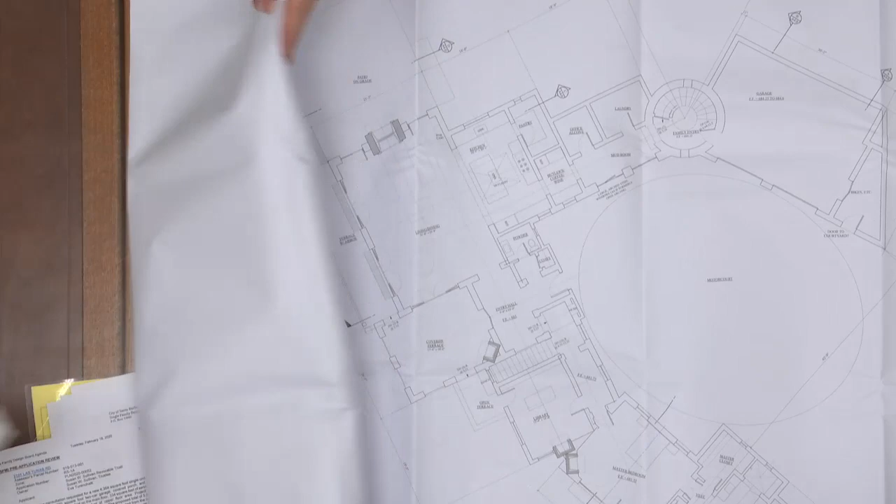This is the main floor. It's broken into little pieces - almost every room reads as a piece. The idea is a Spanish hill town, quaint and charming and friendly.

On the first floor we just have one living kitchen. This is mostly underground - laundry, with a little stair going up to the second floor in the garage. Then library, and now high, medium, low - master bedroom, master bathroom, with a pergola on the arbor to break things up.

This is the lower level - a little sitting room and then two guest bedrooms with bathrooms. This is underneath the master bedroom. Library here. And then this is above the garage.

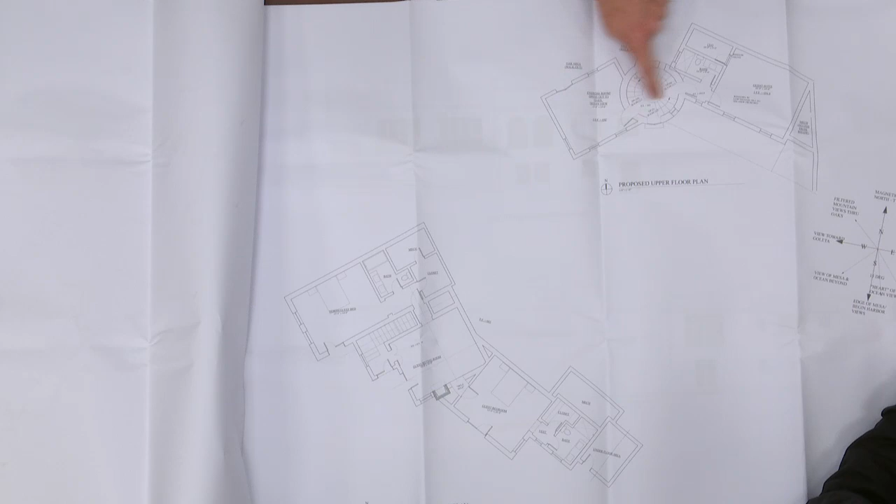It's set back from the garage, and we have a partial roof to break up the mass - this is the hinge. You go up, and there's an exercise room here that goes out to the oak grove, and then a guest bedroom and bathroom. It's basically a 4-bedroom house.

So that's the house. They have a pergola, and this is a stone wall. The stone didn't read very dark, but there's stone everywhere, and we're going to use the stone - Margie can talk about it later too. On the driveway, we don't want walls, we want boulders and everything to be really natural. The house is kinked to follow the topography, so this part faces more due west, and that faces southwest.

And this is inside the motor court. It's the garage, the first leg of the motor court, the second leg with the front door that heads out toward the view. We've got the exercise room, a 2-story part, which comes back around to this.

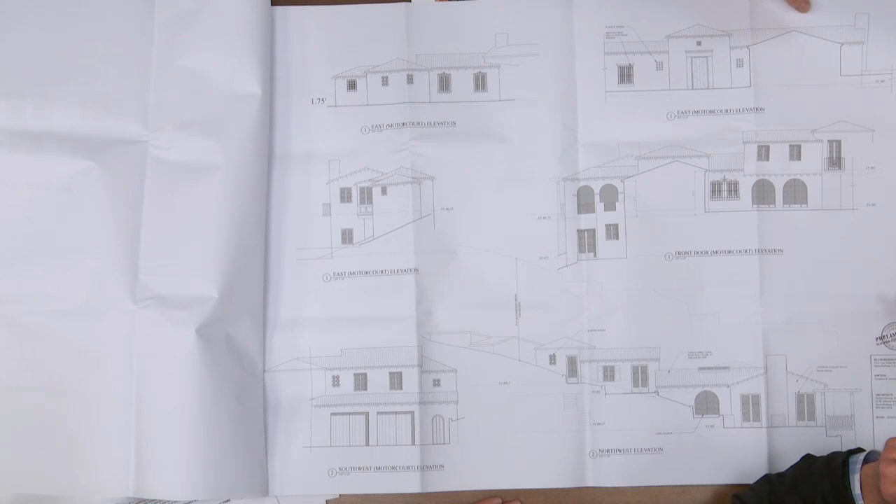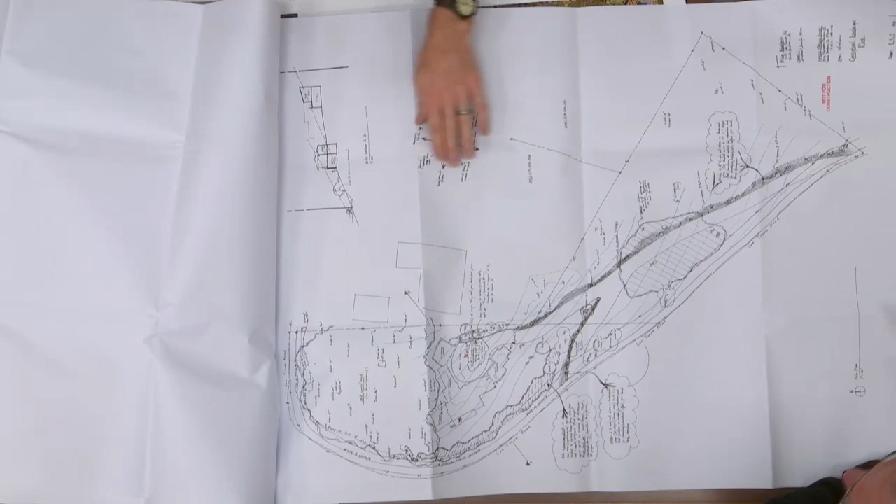These are site sections in addition to this section. I think the owners met with most of the neighbors, and one neighbor wanted to see how their house looked. Yeah, and that's what that is. This is landscaping.

Quickly, the city's records didn't agree with the official survey. The city says we are 43,000 square feet, but the survey says we're 58,000 square feet. So we're actually 76% of max FAR, and that's with one lot. If you take both lots, because this lot's not going to be developed, we're 65% of max FAR. So we're way under on FAR and we're under on height.

So we're at the conceptual stage, obviously. What we looked at is on the architectural plan, the engineer shows a 4 to 5 foot...

So on the architectural plan, we're seeing built retaining walls along here that run 4 to 5 feet high, shown on the architect's plan. And we look at cutting this instead of vertical, so the shaded area would be cut to less than or not to exceed a 1-to-1 slope. And boulders would be added in there as needed for retention and also for decorative naturalistic effect, and those would all be sited by me.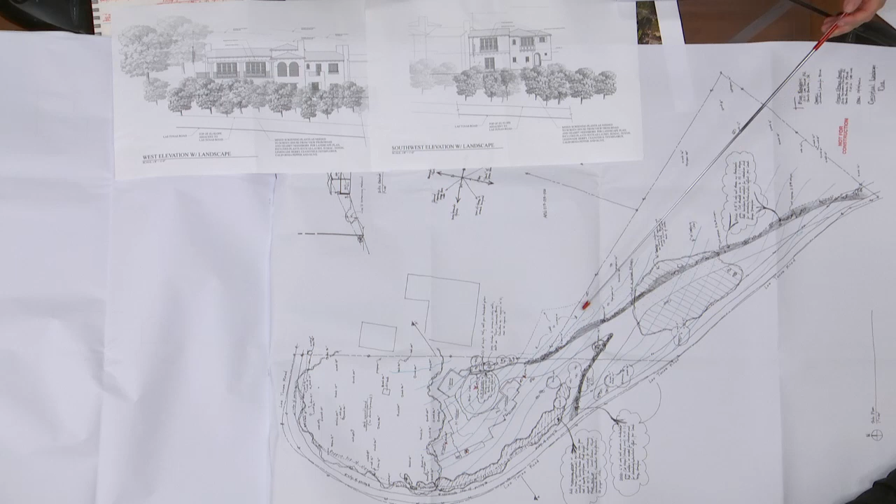And as we set boulders, we'll be careful not to exaggerate any sort of lineation in through here. This also works very well for keeping our fire truck access available and open.

Same thing happens here as this shows, this is delete the 6-foot high retaining wall here. And again, just do a cut versus a vertical retaining wall and do the boulder pile thing as needed, and maintain our batter as well as our total height. Then the other thing that comes into play here is we want to see.

So really, literally, this is left as is, more or less. A little grooming here, a little grooming there to make sure that a few shrubs are healthy and whatnot. And we want to, again, you don't see this driveway from anywhere else, but as we come down we get peekaboo views out. This is our oak woodland area. It's basically left the way that it is, other than fire management, tree health, structure safety.

So you see this is the edge of paving here. You see this is the center line of the road bed or right of way, and you see this right-of-way line along here, and you also see a slope line here. So this road cut here is pretty steep. I put these contours at 5 feet, just showing the 5-foot contours, and the idea would be that nobody really sees this house and they don't really see the other houses.

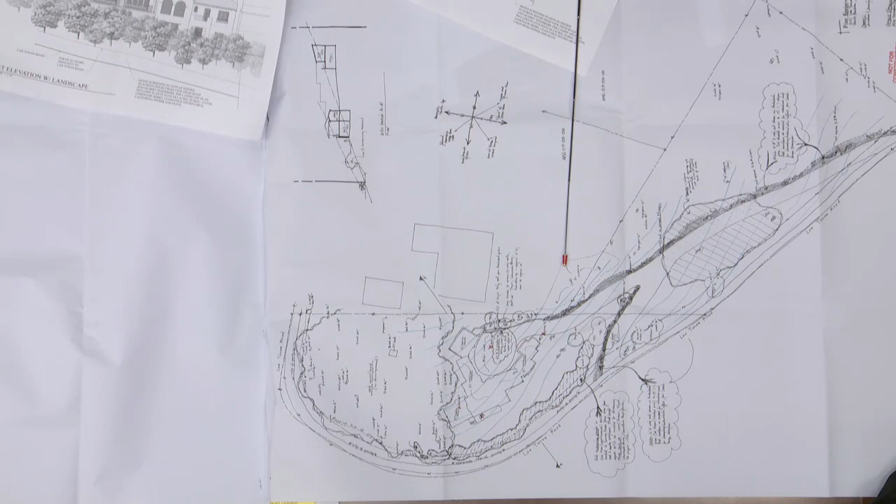Here's that section, and you can see that as you get down here, here's the car at the roadway. And if we get vegetation that's at this 15-foot high line, we'll be able to preserve views over. But as you look up the slope, this house will mostly be in the shadow, if you will, of the view shadow of that.

So the plan here is really literally not very much. What's up there right now basically gets weed whacked once a year for fire management. And then what we do here, where we have our tallest walls, is we step them back. We've got trees at the middle height, and we build in front of them. This isn't retaining, this is a planter bed. So we soften that not by climbing vines, which are fuel ladders, but by smartly placed planter beds.

Very nice. Everything's drip. What else is there to say? Smart fire, smart water, smart maintenance, smart fire, because that's where we live. Smart native plantings, etc. Anything you guys like to add?

Aaron's here in case there are questions regarding driveway or fire department. All right, did we get any, didn't we get a letter, correspondence? Yes. Okay, this is item 6, right? So I'm doing this right? Wow.

No, we're not item 5. We're 6.

We, the owners of property at 2175 Las Tunas Road write this letter in support of this conceptual home and landscaping design for the property at 2121 Las Tunas Road. That property is adjacent to and immediately to the west of our property. The purchasers graciously approached us and several of our other neighbors to share their plans for the two parcels. Those plans included building on the upper portion of the most distant parcel and limiting construction on the intervening parcel, the driveway access, and open space. The open space and large boulders and natural terrain provide a signature landscape for the Las Tunas neighborhood, and the Blum's plans are sensitively designed to preserve the feel, natural terrain, and landscaping. The size and design of the house was equally sensitive in minimizing size, bulk, and scale. So that's a very supportive letter.

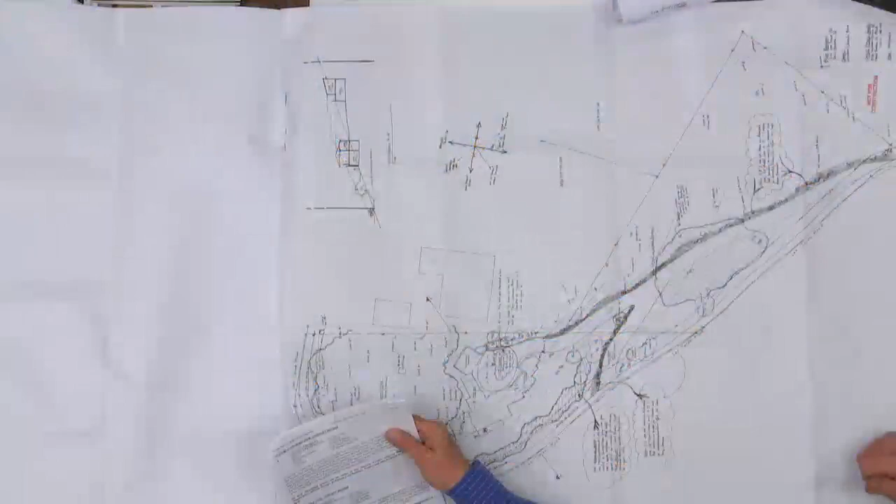We're here to only give them comments. It's a one-time pre-application, so you basically want to get our input, our feelings on it, so they know. They want to know: if I buy this lot, can I build this house? Got it, got it, now I understand. Okay, no pressure, no pressure. And would you mind paying for it? Yeah, right. I'd need an answer right now. Okay, great.

Thank you, Joe—question? No, I don't have any questions. All right, I think we're at a point where I haven't seen enough, but I like it. That's a comment. I made a comment, I can't make a comment. I'm not supposed to make comments.

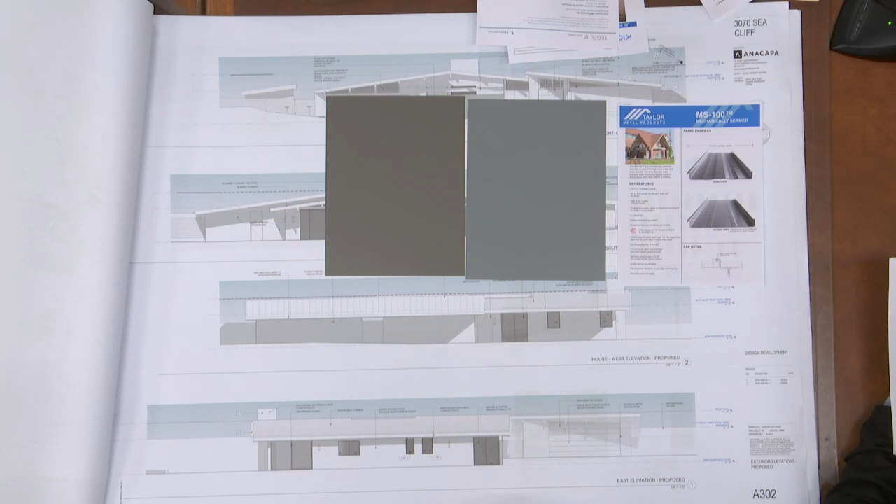Is this the roof? Yes, for the garage portion only. So the gravel roof is to remain on the house. It's a mid-century inspired house, Eichler inspired. For now, the client has said they would like to retain the original gravel roof, so the only addition will be here, as we can no longer put in gravel roofs, which is basically extended—the roof is just extended right out.

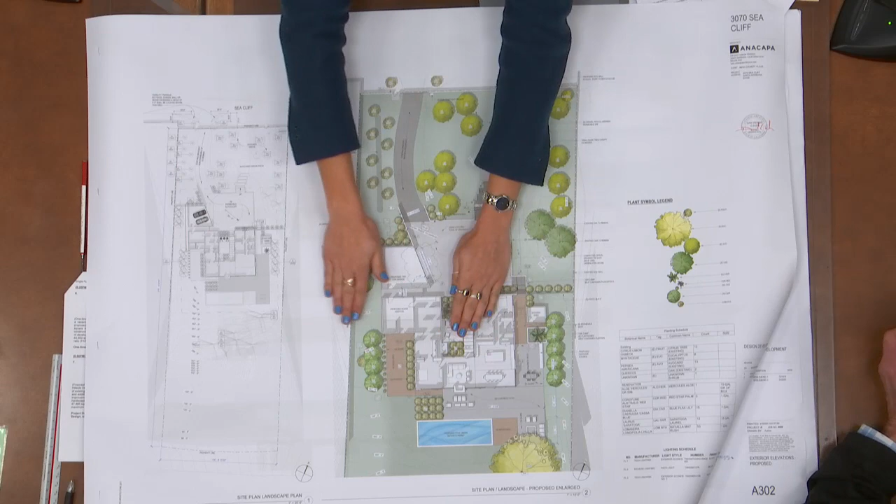It's actually right here. I think it might be a little easier to see. The garage is actually angled into the house, just to make it easiest to see it right here. So the garage portion is right here. There's a roof line that directly echoes the slope of the original house like this, and the roof of the garage goes like this over—it's the exact same slope, just in a different material.

Since the slope is so shallow, does the seam have to be higher than what we were wanting? No, actually the seam we were able to achieve exactly with what ABR wanted. We were a little worried about it because most conventional products state the slope has to be greater, like a 3 to 12, but we were able to find one that achieved the same thing.

Our next item is to provide a more detailed landscape plan that calls out the hardscapes. This is the same plan as the one in your set. I've included a colored plan. The hardscape remains as is. We're proposing a concrete patio here with a step-down wood deck and a pool under a future permit, and a wooden deck here, which we're expecting to have slight spacing between so water can still infiltrate directly down.

At this point we have a civil engineer who has been signed up on the project, but we couldn't get a full Tier 3 stormwater management plan. He was not killed on the project—sorry, he was signed up on the project. But in preliminary discussions about this project, we've identified a few areas for Tier 3 stormwater management and some practices that we would like to implement on the site.

We would like to do a vegetated swale, and one location we found—these are existing fruit trees in a fruit orchard, I believe they're citrus—so we were discussing adding a vegetated swale in this location to try to filter the water out towards the street, including raised planter boxes in the front of the house and this side patio. I believe we are also going to try to do detached gutters to channel the remainder of the water that could come off the roof.

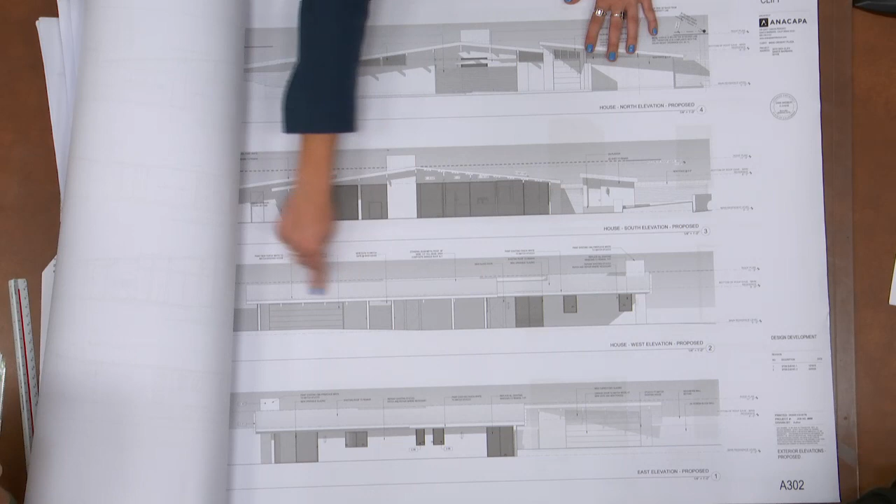Which is visible in this—I think the annotation's been added in that one. It is. Oh, I'm so sorry. No, that was me. We've called them out as kind of—I believe this is the elevation that is not reading correctly, actually, that I have those ones. Do you mind if I pull the elevations from that set?

Garage door to match the wood at the exterior, and here is another additional note that it's to be a horizontal wood Ipe, a 1x6 plank. There is actually one additional item that the board has not yet had an opportunity to review.

Since our last meeting, the client has indicated they would like to put in a site wall along the front of the property, which is to be CMU with a stucco coating, and have also Ipe man doors and a motorized gate. What's the height? Currently we are proposing it at about 5'10", to match the ones existing on the neighbor's property.

In speaking to Erica, we will be needing an administrative exemption, I believe, to proceed with final approval on the gate. Regarding that gate? Yes. So do you have any drawings of it? I do. I have them on the site plan as well, but I can show you the elevation to begin.

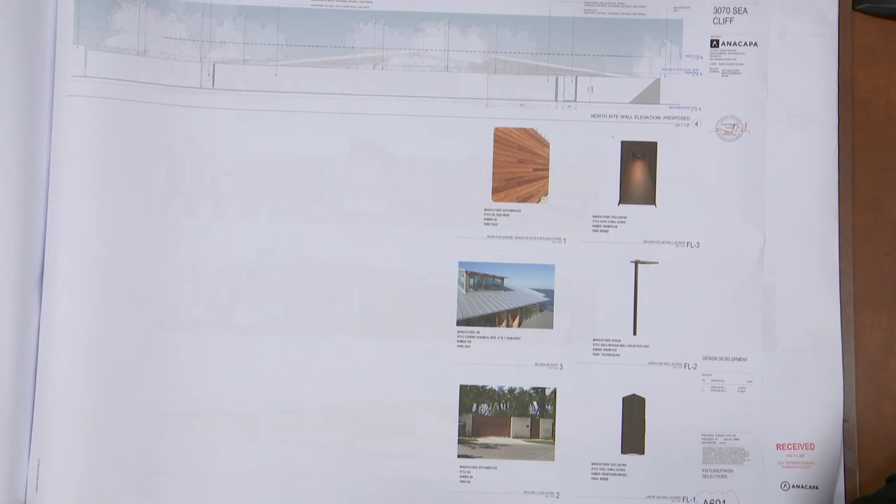This is going to be along the front property line, and it's actually a little bit lower than the neighbor's current gates. I think here we're showing it at 5'11", not 5'10". Okay, and this is the Ipe material, once again, that we are proposing to use.

So is that wall included on the landscape plan? Yes, it is. Let's take a look at that. Where would it be? It is located right here. It's on the property line, which is why we will need to get an exemption.

The reason we would actually like to keep it on the property line and apply for an administrative exemption is because if we were to push it beyond the 10 feet required for a higher gate, we would be directly affecting the drip line and root systems of these existing avocados.

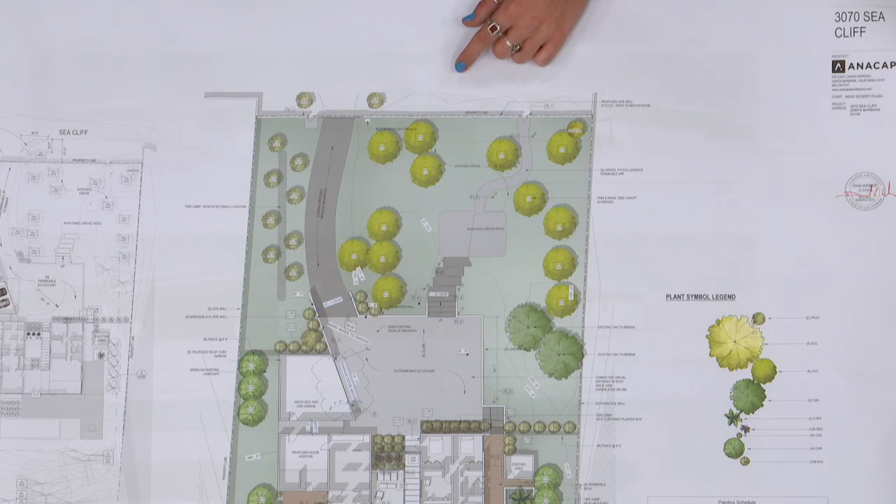Okay, do you have pictures of adjacent neighbors showing these kind of walls? I do. So it's kind of—actually, in this set.

So this is one of the neighbor's properties, and this is the gate directly adjacent. I'll just show a site plan. This is another of the neighbors that has an approximately 6-foot tall gate.

This is the directly adjacent one, and I believe this is showing our property right here. This is across the street, the corner of that massive land that was condemned, where they're removing the soil all around the back and side of it. I think these views might also show some of the side walls from the neighbors. This is our property.

I think one difference to point out is that our property line is actually on the edge of the street, versus the neighbors' properties. All of their fences are set back 10 feet from their property lines, but their property lines extend to the middle of the right of way. Ours does not. Ours is the only one on the block that does not, so there's a bit of an interesting design challenge there.

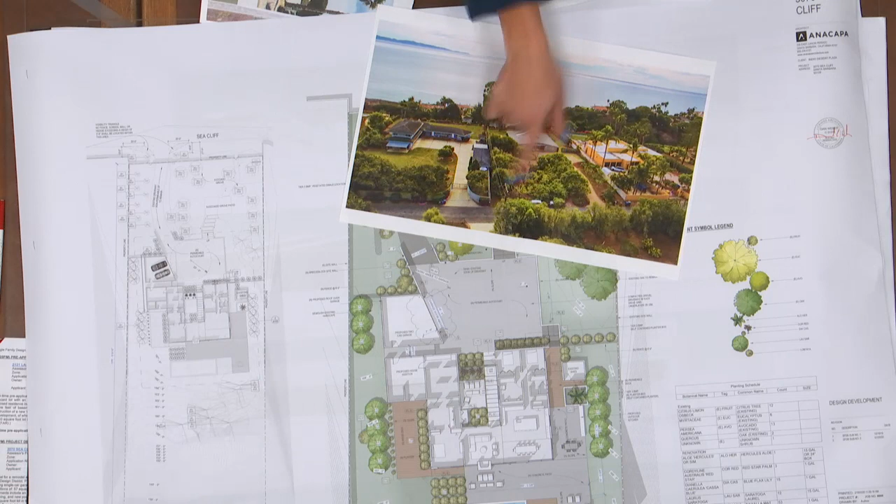And I believe the last item on comments was our lighting. I actually included the light fixtures on that last plan as well, and the site plan might reference their locations a little bit better.

We are proposing 3 different types of light fixtures for this project. One is an LED shallow shade, which you have in the landscape already. This one is more of an accent fixture, which will be more on the sides of the property where the owner sees it. And this is for the site wall, used on the front next to the garage and at the entry. We figured this was a slightly more robust fixture.

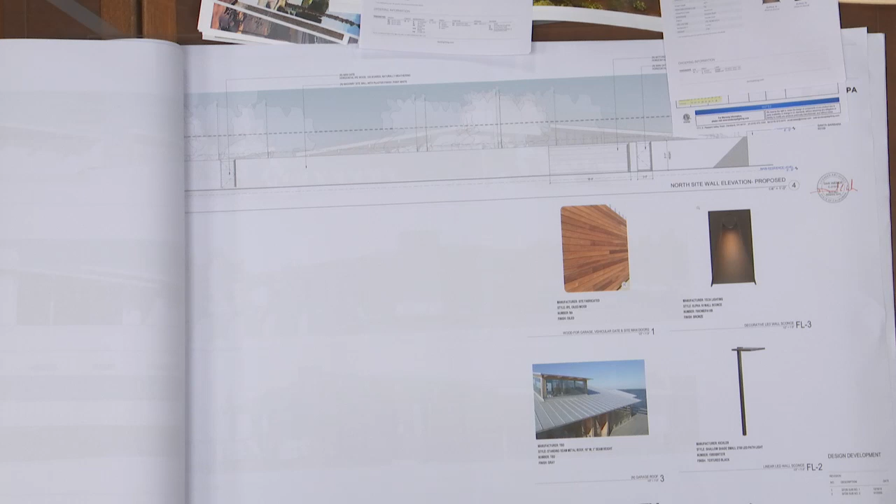Got it, okay, well thank you. So where's my minutes? Here we go.

Stormwater management plan, did you go through that? Yeah, the vegetated swale. Thank you, got it.

Can we ask questions? Yes. So will you be able to do any planting in front of the wall, or is it right on the street? That's a good question, because that's what I was asking too. Our property line is currently there, so we're proposing our wall directly adjacent to it. There are some fruit trees currently existing, but I believe since it's not our property, we can't really propose landscaping on it.

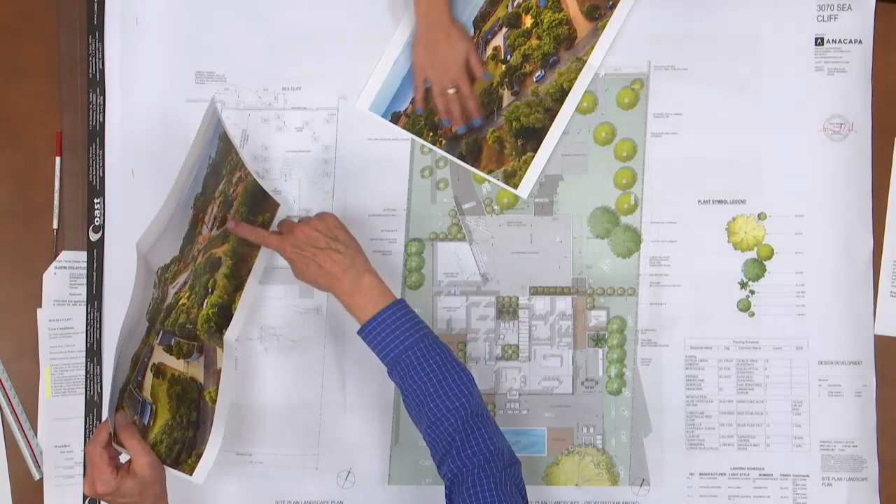Is there dirt there, or is it concrete or something? It's right onto the avocado orchard kind of. Let me see. It actually does set back a little bit. This corner wall might show it a little bit better. Oh, there you go. So they're actually farther back from the adjacent walls. So as far, the paving does not go to the wall. There's a little bit of a no man's land that they will landscape.

And lots of the homes there have gated, 6-foot gated walls. I've been up there. I was wondering because this picture looks like it's right on the cement. It actually goes back, you can see the line, and it's actually behind these two plants. Okay, that was my question.

Just for my own interest, you're the only lot that's got massive trees behind it. Looks like everybody else has taken all their trees out for the view. I think the clients would completely agree that those eucalyptus trees on that bluff are spectacular. They only add to that view.

Wow, there you go. So did we get any public comments? No, Mr. Chair. Right, so I'll bring it back to the board. We were into questions. Any other questions?

I don't have any, you answered all my questions. Any comments? I think we've spent quite a bit of time on the site plan and not enough time on the house itself. Looking at the house, analyzing just between our initial meeting...